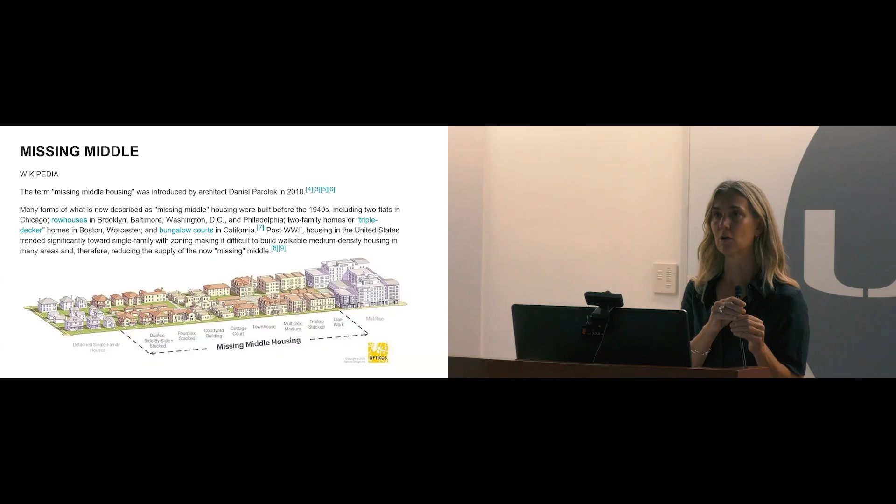But that is where I think part of the heart of the problem is with this housing crisis in the US. There are so many sites that are that scale. And I'll talk about why I think it's so important, but also why it's been such an issue. And it is urgent, especially in places like Boston. So the missing middle is defined by duplexes, courtyard buildings, townhouses, triple deckers, the 6-flat, which is the Chicago type. And so it's anywhere from 5 units to just below 50 is what we think of as the middle scale.

This is our mayor, Mayor Wu in Boston, and there's several cities like this, which is why I want to run around the country and talk about it: there are so many parcels that are the right scale for these smaller site developments. We are 200,000 units short of what we need, according to all the research in Boston. And we're trying to get 200,000 more units online by 2030, which is crazy, but that's what we need in Boston. So that's a lot, right? 200,000, how are we going to do that? How do these little sites even make a dent?

We have thousands of these small parcels in Boston. There are thousands of these small parcels in cities like Chicago, et cetera. So how to help solve it? Smaller lot developments. So Boston, snapshot, these gaps between the buildings that you can see throughout this photo. We have, again, thousands of these. And they're not for big developers because you can't do a big building. That's not what they're interested in building. They're for smaller developers. And there are a lot of them trying to make the bottom line work.

So Detroit is another interesting place where we've been building housing for the last 7, 8, 9 years. They had no building at all for 30, 35 years until about 7 years ago. And now it's been kind of booming and it's amazing. I was at a symposium at University of Michigan a few years ago. That's Maurice Cox, who used to be working with the city during that time, and a few other voices on housing. And again, this whole idea about the missing middle. For example, this was Detroit, full of those small parcels back in 1930. This was Detroit as we found it when we got hired a few years ago to build some housing there.

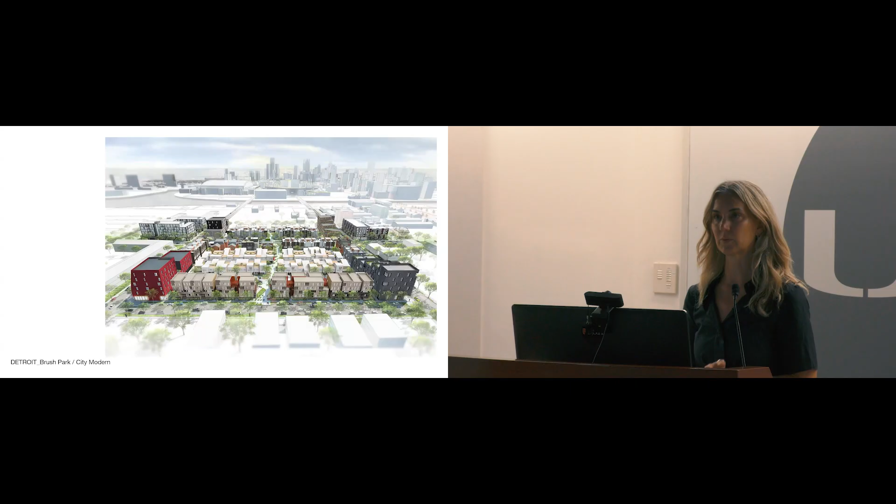This is a view of a project called Brush Park City Modern. It's a neighborhood in Detroit where Bedrock Development out of Detroit hired a handful of architects from around the country to be a part of rebuilding from the ground up. So you can see there are a bunch of different scales of housing, and the ones that are circled were our scope at Merge, and I'm going to show you a couple of them tonight.

Chicago, as I mentioned, also has this problem. They just put out a catalog in the past year. They had a competition last year, and they invited a bunch of firms to come in and come up with some ideas for these smaller parcels. This is Chicago. They also have thousands of these sites. They put together this really beautiful book of our proposals, and that one square is ours,

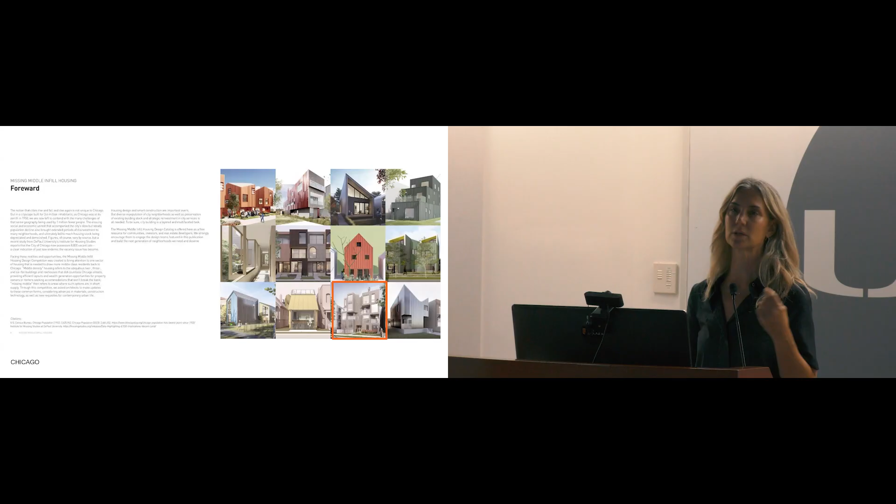which was called the Not So Flat 6-flat, where we had a split level. I'm not going to get into this one tonight, but I just want to show you how the country is trying to tackle this problem and how this has been very much a part of the architectural discourse as of late. So again, how to solve it: smaller lots.

Because I just got here, but I think this housing for all discussion and dignity, I get it, everybody wants a nice place to live. And part of that is a really great building. Part of that is the neighborhood. Hopefully you get both. And space and having enough room and so on and so forth, and potentially raising a family. So not everybody wants to live in a single family house, but I think we all want a home that feels personal, like a single family house and the ideology of a single family house does.

There is something really wonderful about urban living, right? Especially the missing middle scale, because, for example, balconies are close to the sidewalk and they're very much a part of the dialogue with the streetscape. And then there's the stoop, right? The history of all the things that happen on a stoop and the kind of magic of the stoop in a cityscape. I think some of us remember Sesame Street.

And then, sorry, these are a little dry. I'm going to get to the projects in just a second, but I think it's important for you all to know as well, especially the students. Most of the scale housing that's built in the US requires 2 means of egress, 2 stairs. That's a life safety thing. So it's a hot topic because nobody wants to change it. There's a lot of liability, but Europe doesn't require this. That's one of the reasons why there's so much incredible housing in Europe.

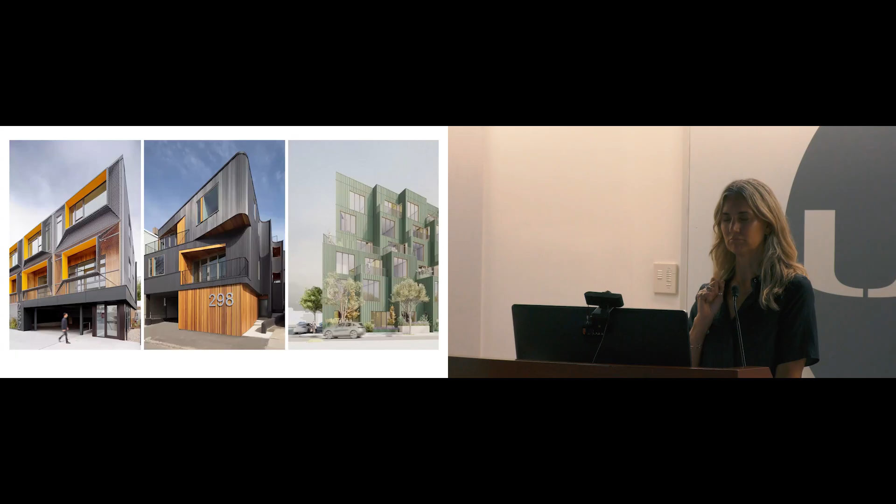So we frame the context in various ways, and we also respond to it. So our work, everything doesn't look the same, although I think there's a sensibility about it that gets repeated, but it is tweaked and tailored and designed and reconsidered for every single site. So I'm going to show you several projects tonight. These are just a few shots of some of them. And so, type.

Just like you guys, I walked by Christina's studio today. They're looking at precedents. I've been teaching housing at the GSD for the last 6 or 7 years. We do that whole thing too. We look at the canon. And these are just 3 projects that really stuck out to me before I started even my first housing project at Merge. Narkomfin, which is Ginzburg's really fascinating shared living multifamily in Moscow. WoZoCo, which is MVRDV's housing project in Amsterdam, and of course, Corb's Unité in Marseille.

So that's Narkomfin on the left, the MVRDV project with these barnacles sticking out in the middle in Amsterdam, and then Corb's Unité.

And what really struck me about these, and you guys are going to see this if anybody's here from Christina's studio. I don't know anybody here, so I can't tell. And you're all like little heads with this setup.

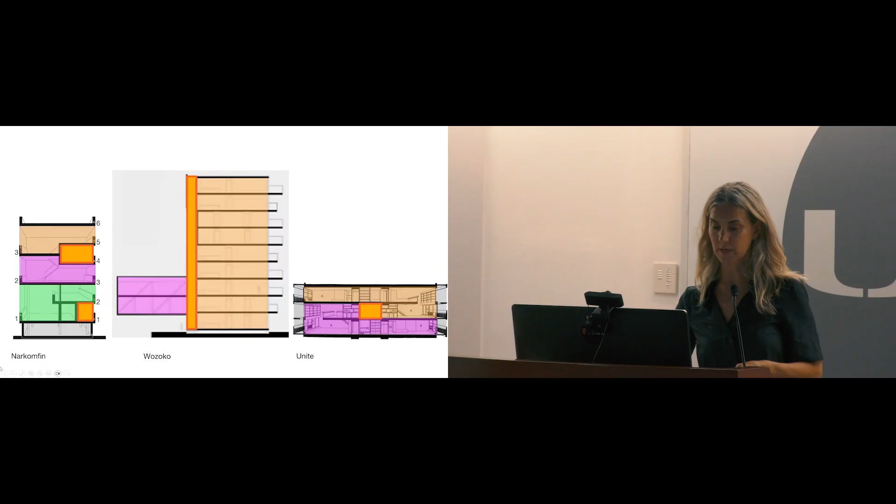Look at the circulation. It sounds boring, but it isn't. What these 3 projects did so masterfully is minimize the circulation, minimize the corridor, so that it didn't happen on every floor, so that these floors, like in Narkomfin, could be used for the unit space versus the circulation.

Can you guys see the cursor? Oh, good. Okay, cool. So the orange is obviously the circulation. So look, there's this big beefy building, and those are the only 2 areas where it's public circulation. The rest is given back to the unit.

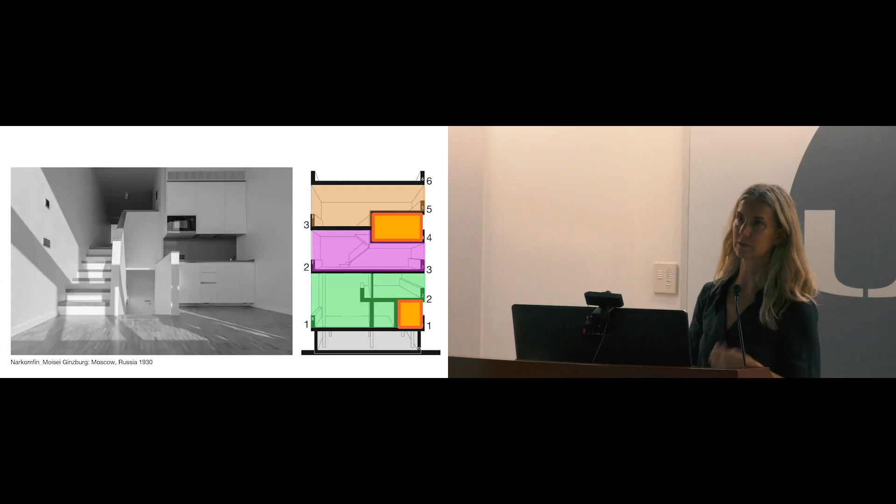This is a single loader with WoZoCo. They had to have air rights. They couldn't actually land the building any wider than the yellow zone on the site. And so they hung off these units, which is a super interesting and cool way to resolve more square footage without touching the ground. And then the Unité, of course, puzzles 2 maisonette units around this central corridor. So 3 stories, only 1 corridor. And of course, those solutions I think create some of the most interesting interiors.

So just gonna race through here. And then of course, other typologies. Those are kind of building types, circulation types. We're gonna look at duplexes, townhomes, triple deckers, et cetera. And so craft, again, just a really fast history. These are the ways that we at Merge think about and thought about, especially in the early years, how to put things together. And we related little projects like this peg wall, which was ours, to projects like MVRDV's Silodam, which were happening at about the same time.

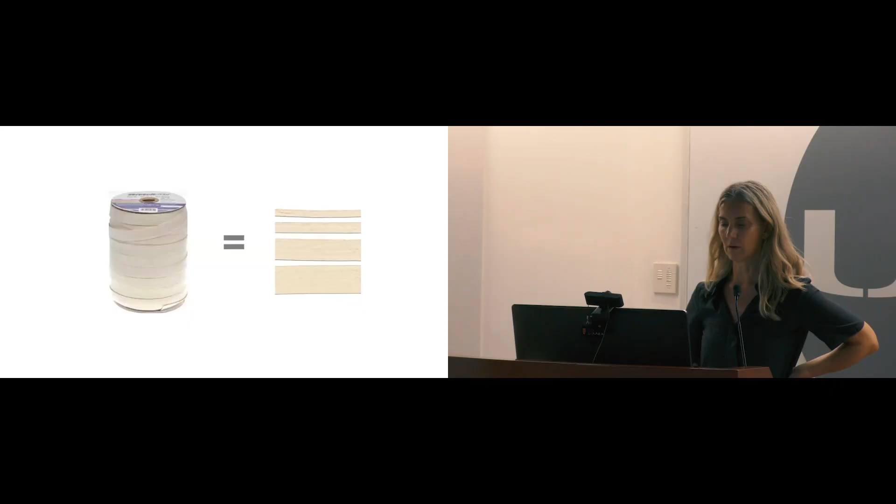We're scrappy, right? So talk about ordinary. These are just straps that we created this kind of landscaped texture on the wall for a restaurant. And then the idea of the componentry of these boxes for a retail space where objects become kind of interior landscapes. Then they become architecture, right? And niches. And then just the expression of the fabrication and how things go together.

So those are the conversations we have at Merge, and then how we started to scale that up into the context of our housing sites. So the first project is one of our first. I always show it first, Marginal 1.0, because we did 3 buildings on the same street called Marginal Street. This is in East Boston. It's on the water of an operating shipyard. It's right next door to it. This is the building right here that we built.

And so it's really fascinating because this is East Boston. So it's a working class neighborhood. It's been on the rise, it's getting gentrified. It's wonderful. It has all this potential, but it's been one of the lower income neighborhoods in Boston for decades. And it looks right across, though, has the best views of any neighborhood in Boston back to the skyline of Boston, which is over here.

So the seaport area that I showed you where we work is right here where my cursor is. So this is all downtown Boston. This is East Boston. There's a couple of bridges that go over there that connect it. And so this was our site, flanked by this warehouse building and triple deckers, right? So what are we gonna do? And so we had this sort of double wide, triple wide site. We did this dumb box. The budget was nothing. And it was right on the water though, which was pretty extraordinary.

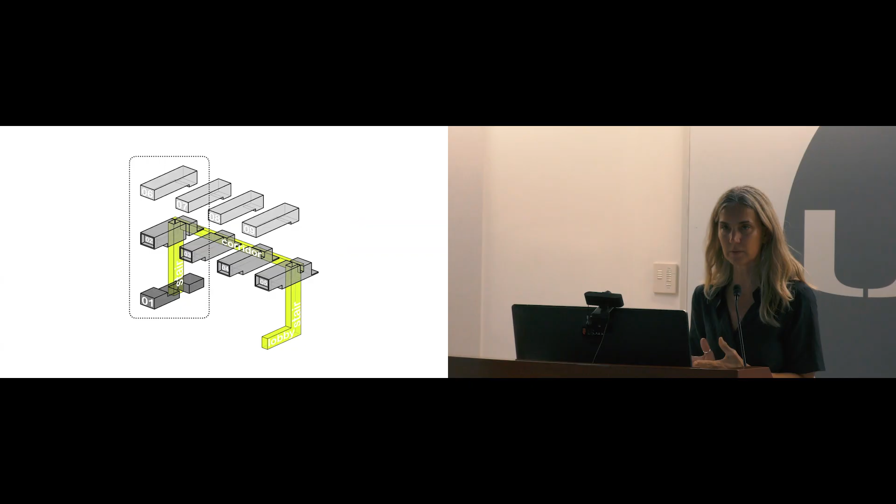And so again, back to the 2 means of egress, we had to get 9 units. They had to be really narrow. They all had to have water views. We had to fit all these bedrooms, right? And so we really needed floor-through units. And yet we had to get the 2 means of egress to cross grain through them in the middle. And so it became this puzzle of how to maximize the minimum of common space, which is a big equation for the developers. They want as little common space as they can get until you get into really luxury condos and rentals, which have a lot of amenity spaces.

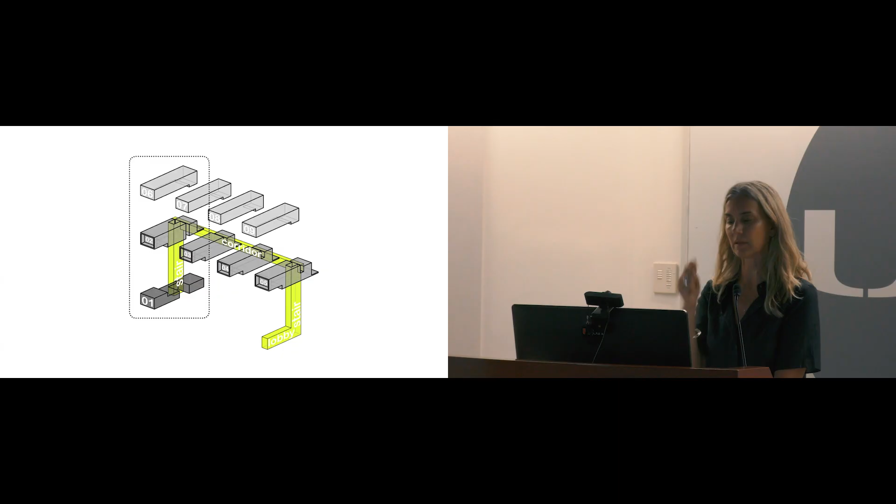None of these projects, except maybe the last one, are about that. They don't have the luxury of actually having that kind of excess square footage or the price point. So it's all about giving as much back to the units so that the sale prices are bigger and the units are better. So this in section, or in concept, were these stacked tubes, floor-through units. We had to get parking, which has been a beast in Boston for many years. It's changing now. And then have these two means of egress that skewered through the middle of the section.

So much about housing is gaming zoning and building codes. Zoning wouldn't allow for more than a 3-story building, but we snuck in a 4th story in the middle. No one was the wiser because it looks like a 3-story building from the exterior. And we're able to have the top floor units accessible from the floor below, which allowed us to not have to have a corridor in the top floor.

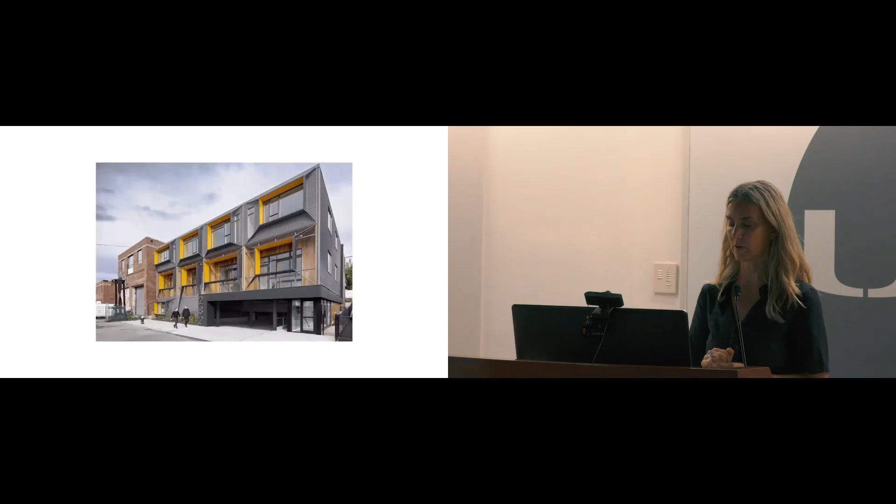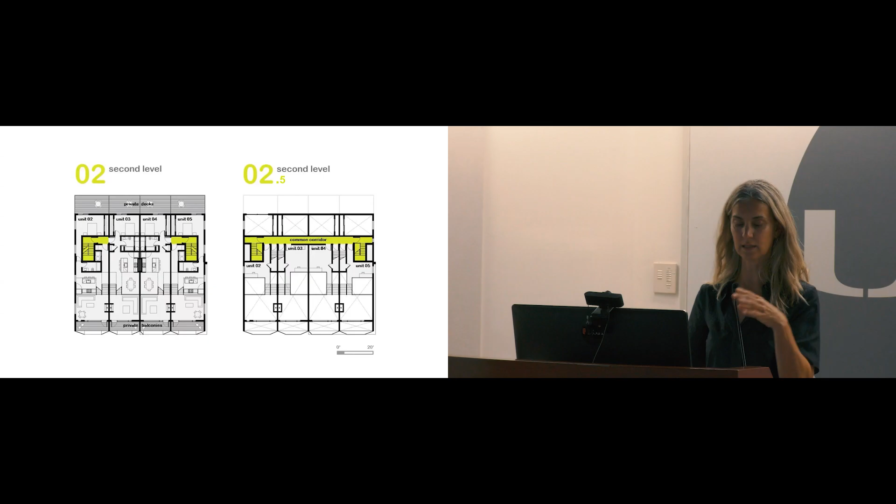So, you know, it's a pretty simple box. Again, snuck in that 2 means of egress, and this shows the circulation on the ground floor. It's separated. Separated on the 2nd floor, 2.5 floors up is the only corridor in the whole building that connected it and allowed for access to the top floor, which has no corridor. And so again, these units in the middle, which were quirky, became, I think, the most interesting spatially and volumetrically because they have all these kind of catwalks and layered space and so on. And that's the top floor.

The facade we sold to the neighborhood, they thought the design we had looked very odd next to the triple deckers, but it was a very industrial edge. And so we designed it as a kind of vertical screen that we had somebody sew onto this facade. So bringing back in this idea of assembly and the way that we think about craft onto just the front facade as a kind of vertical growing screen.

And just a few shots of that. And then a great view. The thing about dignity, back to that word, that has been set up in your own conversation around this here at the school. You know, part of dignity in housing for me is being able to get outside and breathe. I think in Miami, you have a lot of space, but a lot of the cities in the US like Boston just don't. And so even when we are designing in these shoebox dimensions, we always try to design into and convince the developers to find a way to get the residents to have private or semi-private space within the building.

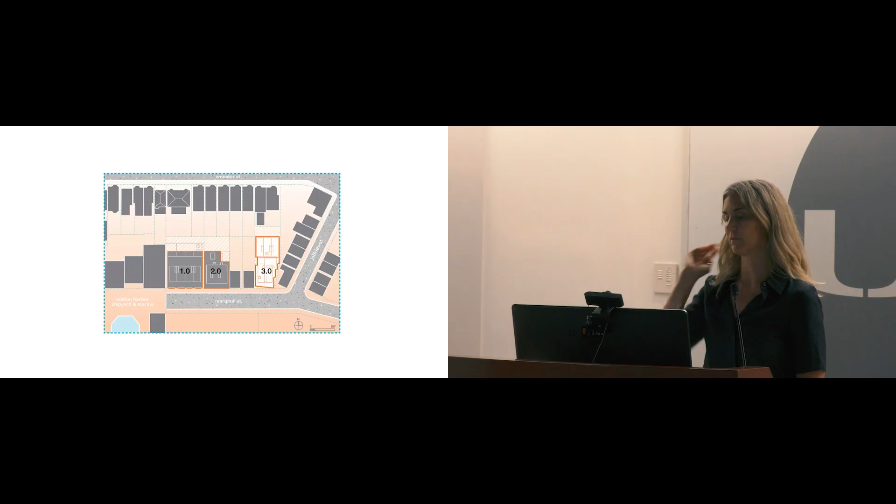Another project right down the street from that, same street, we ended up doing 3. So I'm showing you number 3. Number 2 was a lot like the one I just showed you. But number 3 was a really different site, actually sandwiched only by triple deckers. Very narrow, very deep site. We had to fit 7 units, also near the water. But the only way it would really work, and I urge the students who are doing housing studios to really think about hybridizing unit types in your building.

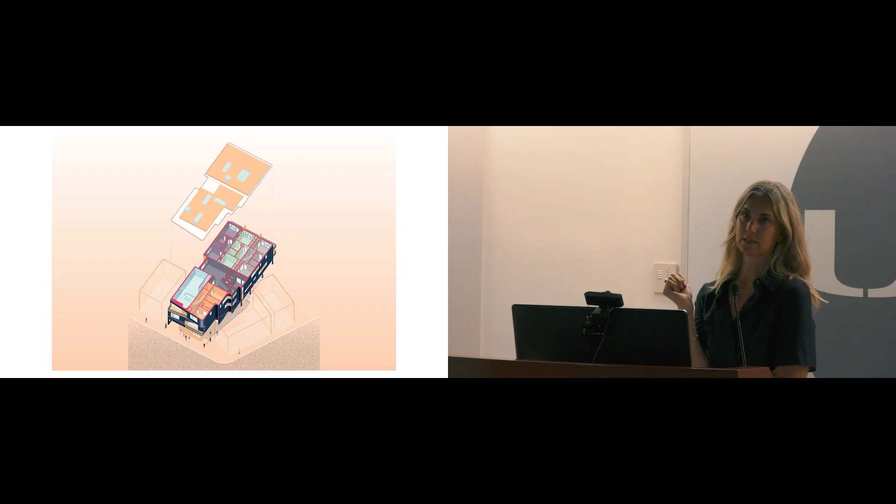Not only does it make for a more interesting demographic that lives there, right? You got flats for singles or studios, and then you might have a 2 or 3 bedroom for families and things in between. So the only way this project would work is if we got really inventive about unit types because it only had a little bit of frontage. Luckily, we had a lot of required setback in the back, which is where this area is. And we sold those back units as townhouse units that actually use the backyard as their front yard.

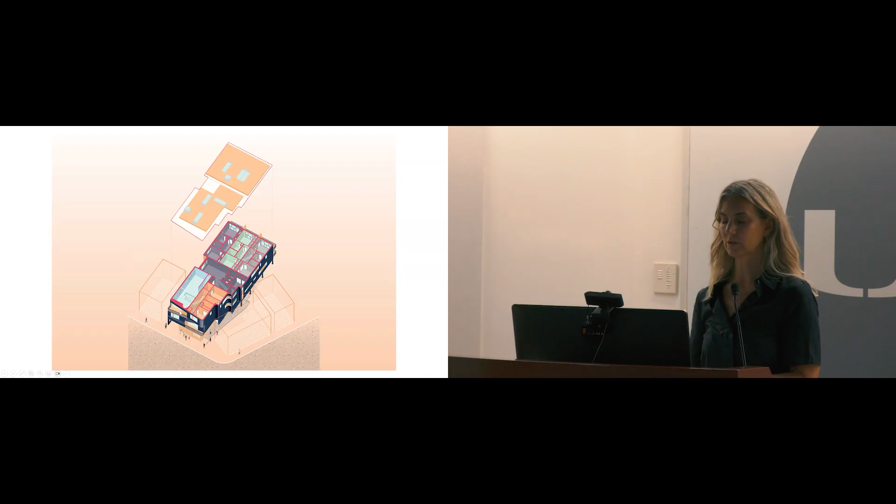2 duplex units on the front that had the killer views to the water. And then 2 small flats, which would be the less expensive ones, kind of landlocked in the middle. And so it became this kind of quirky, Frankenstein kind of hybrid of different unit types. But it was extremely successful because there was a price point for everyone, and we found a way to design for those middle units light and air and even balconies, which I'll show you.

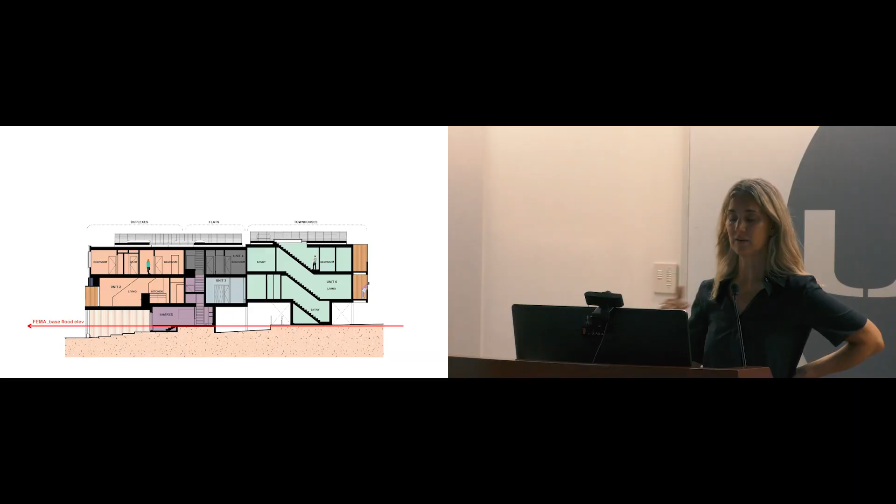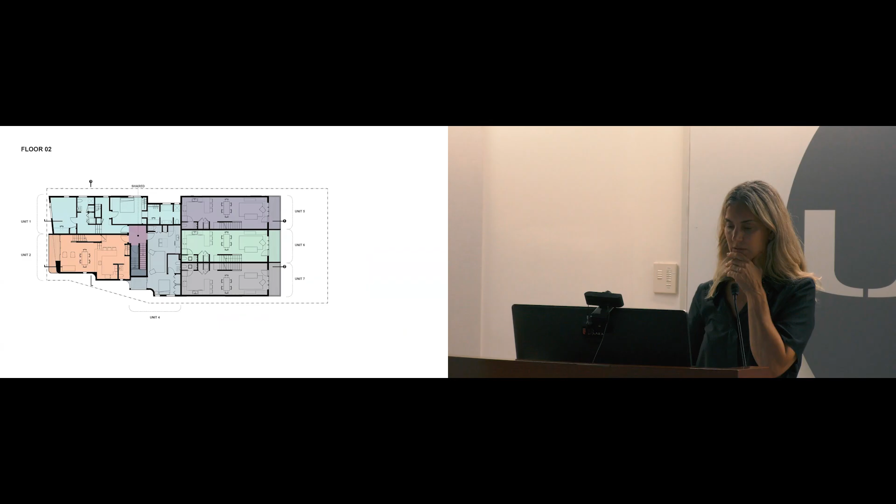And just to complicate it even more, we were in a FEMA base flood elevation, so we had to build 1 foot above that elevation. And so we designed it as kind of the back, the green were the townhouse units that were accessed to satisfy the FEMA flood zone marker. And then the front was designed almost as a separate building, even though they're conjoined as one, with a single means of egress. So again, gaming code, this is the townhouses, and also zoning to try and make this site viable.

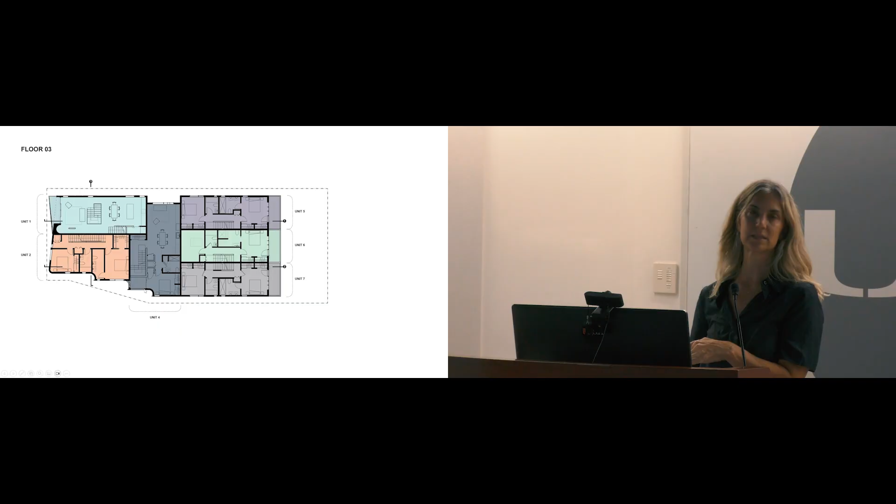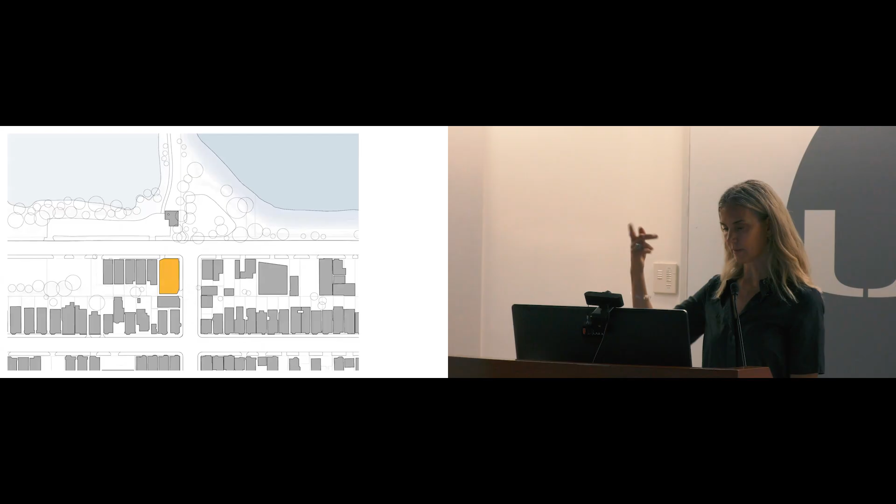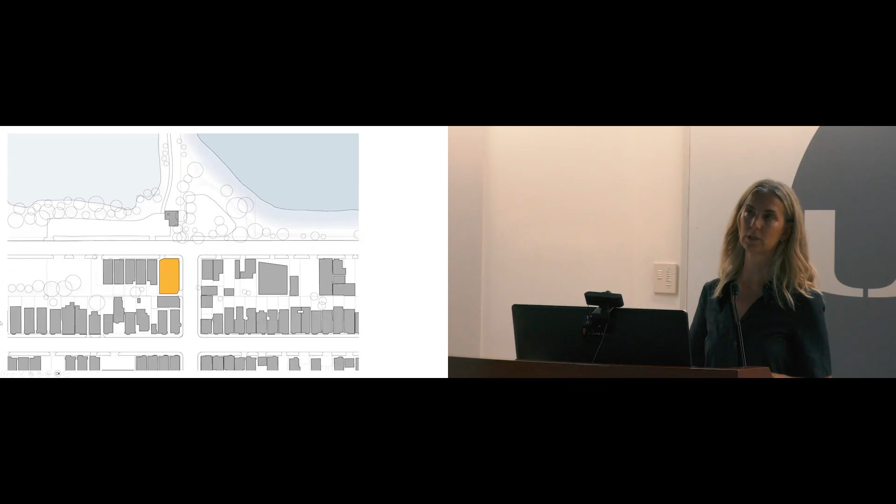Another project in Boston, these are all smaller and then I'm gonna get bigger, is on the corner on the other side of East Boston, even grittier, on a street called Condor Street, facing a very industrial edge, not with a view of Boston, but in a neighborhood that's kind of slowly starting to develop and evolve. But this was a big corner site. Again, a lot of double and triple deckers is the context, and a lot of these small industrial buildings. This white building was the building that we took down, and this is our project site.

So we were on this steep slope dealing with this kind of vernacular. And this project, again, couldn't be more than 3 stories. So we were able to carve in the parking on the first floor, which was counted as a basement, even though it's half in, half out.

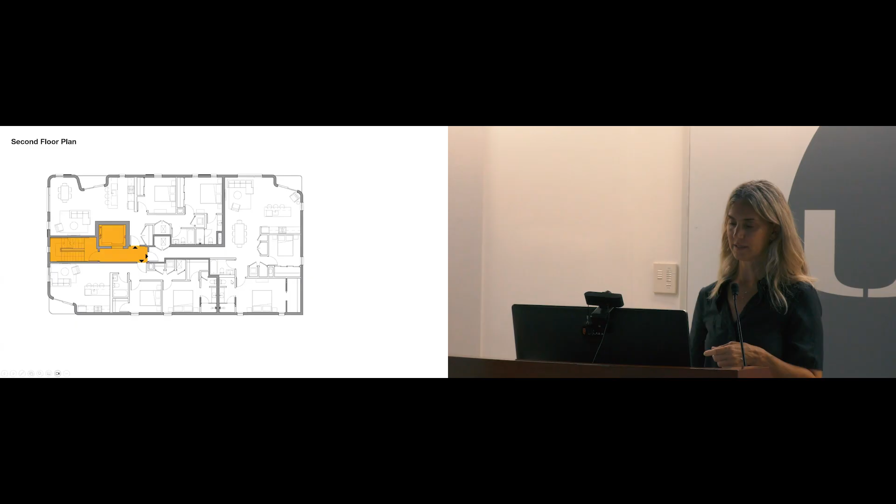The double loaded is very short. Part of the problem with double loaded corridors is they're long. And so again, we gave it back into the unit. Tried to come up with this curved language that would create kind of a counter to the vernacular of these hexagonal bays that have been proliferating the East Boston area for decades, and also try to negotiate that corner of

these 2 streets. And then those curved spaces became a way of zoning the interior in a way we hadn't done before. So like a reading nook, and a way to kind of shape and zone these pretty compact units, but the living spaces with them.

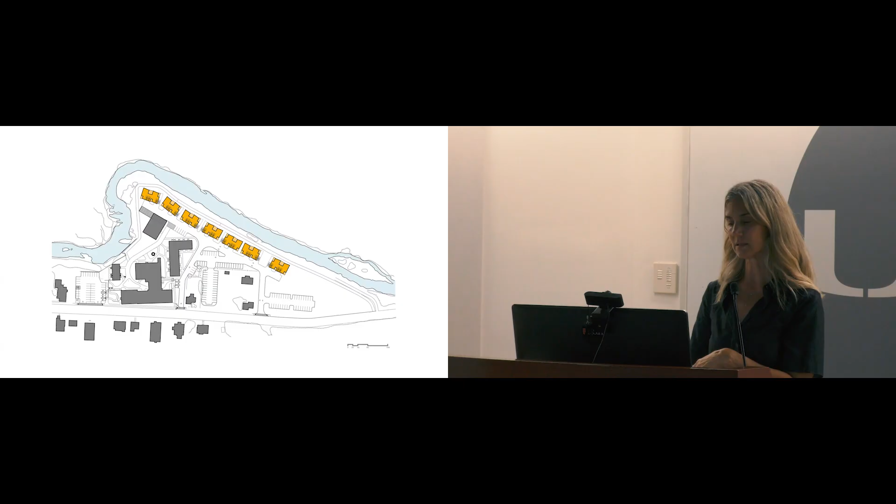And so we got real. We looked at the vernacular barn. We looked at these old vernacular mill buildings. This is actually adjacent and part of our site. That orange area is where we built. These were all turned into lofts, which was a project that was before our time, but it is already turned into residential. And so we did a series of duplexes along the river. So there are 14 units in total.

Looking at this idea of the contemporary barn and the board and batten, thinking of it as a materiality, a kind of translation from, I think you saw a similar palette in these metal boxes that we did in the city that we're bringing out to the country, and how we still, even though it's very abundant with exterior space, how do we carve in this kind of private and semi-private outdoor space for each of the units? Each one of these houses is a 2-family and a 3-family combined.

And so, looking at really dumb, very affordable materials like white cedar and Hardie board. So the Hardie board, we just stripped and made this series of battens in this ribbed texture for the envelope that also became the railing. The units, the 3-bed, the 2-bed, this courtyard, we use courtyards a lot in our projects. Even though they're small, they're incredibly impactful.

I think this is like a 5x7, but it's a way of literally bringing the exterior into the inside of the space, of the living space, and dividing up these 2 rooms for different living areas. And these are some of the images with that small courtyard. You can see how it affects the interior. Feels like a tree house.

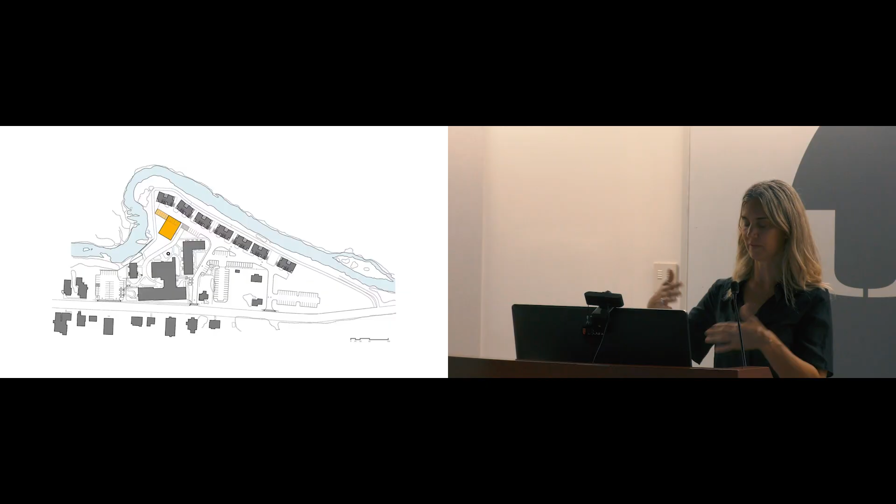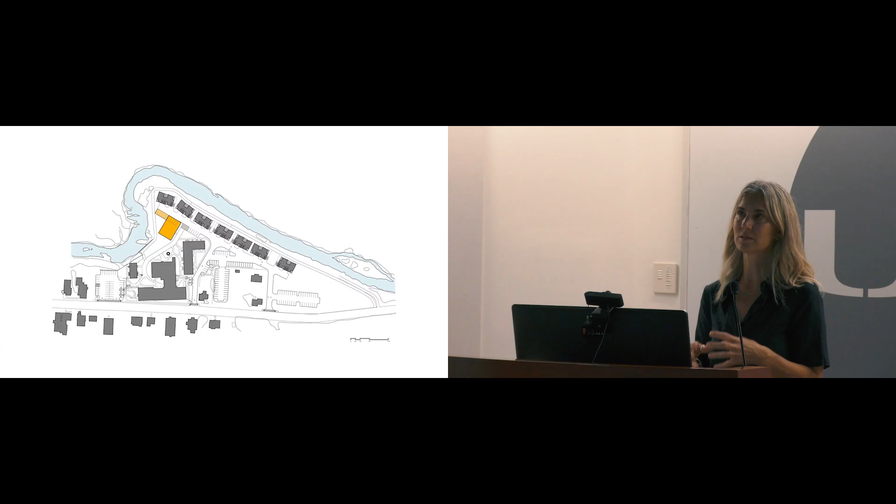And then adjacent to that, a project we call the Modern Mill, which was another multifamily, which really was the transition from the mill building down to the duplex. I was just talking to Rudolph at the reception. He's like, I hate it when people think that you have to transition from a big scale to a small scale in a city. But we could talk about that. But the idea was that this site, the one that's in orange, was a bit of that translation from the historical mill to the duplex.

So again, the historical mill, and then this is what we're calling the modern mill, which was just a 2-story, 6-unit building, taking the batten language, scaling it up to the scale of this building, and adjacent to those were the river houses. So here we look at the language and the detail of the batten in the case of the modern mill building as an opportunity to do this custom recessed downspout. So bringing those elements into the language, which started with the barn, into the project.

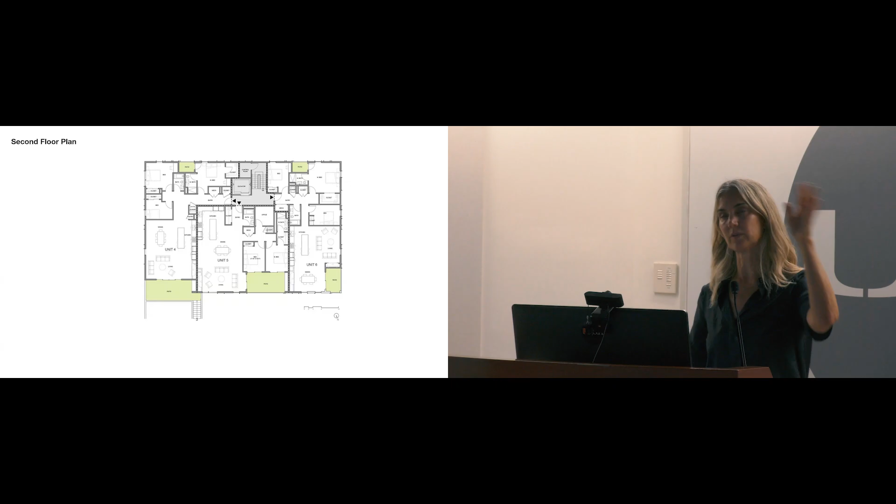Single loaded corridor. I think out of all the projects I'm showing tonight, maybe there are 9 of them. Only 3 projects had 2 means of egress. We were able to strategize 1 stair. So right now, the code that we have to work with in Massachusetts is no more than 4 units per floor, no more than 3 stories, so no more than 12 units, you can get away with a single means of egress. The whole single egress reform is trying to almost double that.

All right, moving on to Detroit, things got bigger. Again, this neighborhood that I showed you before, Brush Park, City Modern, we did what's called carriage homes.

So, all right. So the carriage homes, which were essentially like small townhouses, the reason why they're called carriage homes, and that's how they were branded as well, that's how they sold, was because they live and were built inside of these super deep blocks. So the carriage home, by definition, historically, is a building behind a building, right? It's the building that would house the carriages for the house that was in front of it.

So this was our site. This is Detroit 2014. We showed up, I think, around 2015, 2016. And this was the whole Bedrock development neighborhood. And so it's crazy, right? Because that was all filled with small parcel buildings back in the day, and then vacant, pastoral, and then there are these extraordinary, at the time, neglected, abandoned brick mansions, beautiful, spotted along that had been taken over by squatters and God knows what.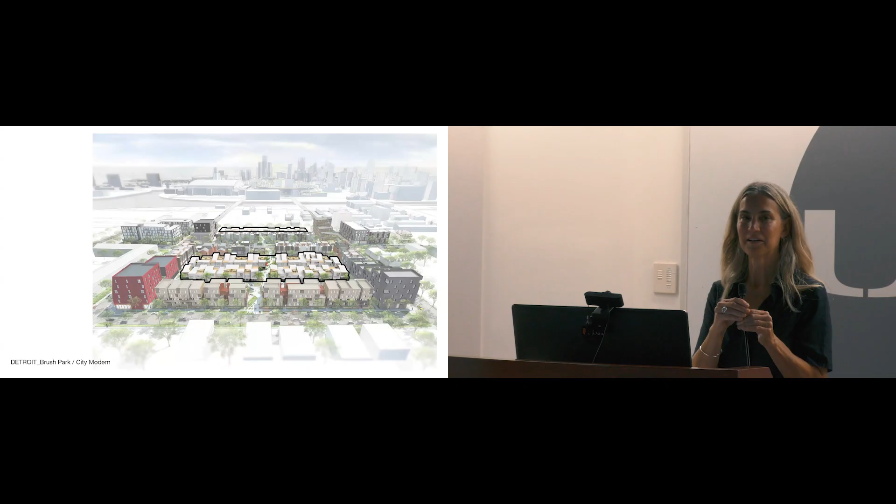And the meetings were incredible. We all had to think about, this is before we designed it, what, your carriage homes, if it were a car, what would it be? It's Detroit. So there was a whole conversation around how do we personify, how do we think about the attitude of these different parcels? And then there are these incredible homes that I mentioned, the brick historical mansions. So the carriage home is the house behind the house. Carriage home is kind of a townhouse. And so those two types were what we were working with.

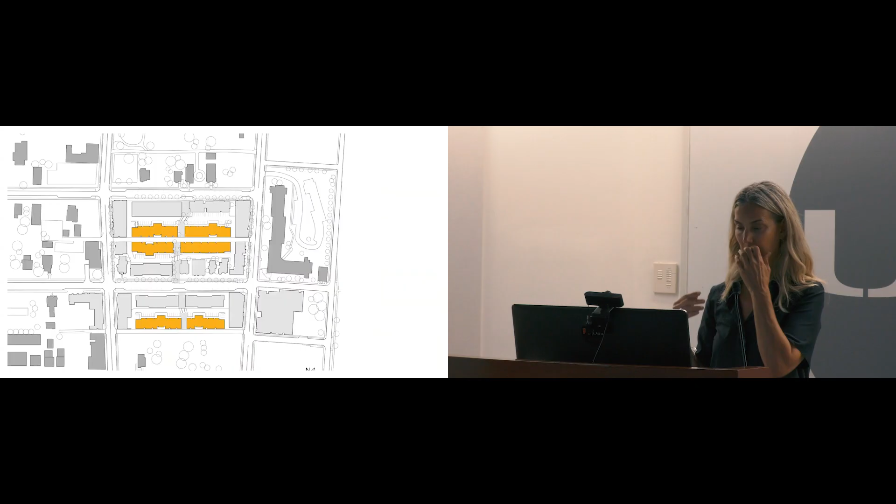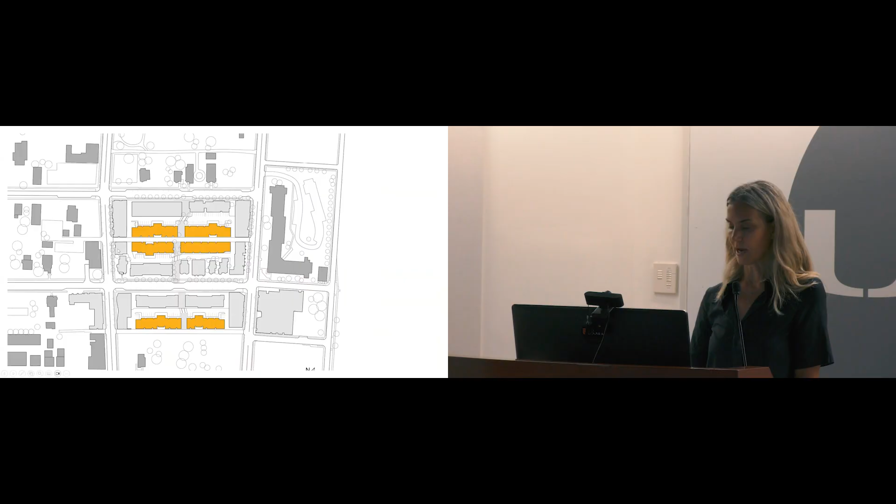And this is our site. So these are alleyways, which became their frontages that didn't exist before we all got onto the project. So that's why they're in the middle of the block and they're called carriage homes. This was the breadth of it. They literally were stitching all of these peripheral buildings together. There's a really interesting, this cut right here, this image doesn't do it justice, is called the Mews. And it's a really beautifully landscaped pedestrian path that cuts through all these blocks.

But the idea was that we were doing a townhouse. The problem with the townhouse is it's narrow, it's deep, the middle of the plan is dark. And so we thought, well, what if we do these paired types that have a small courtyard between them to let light and air in the middle of the deep plan, which is usually where it's dark. So the way, these are condos, these are not rentals.

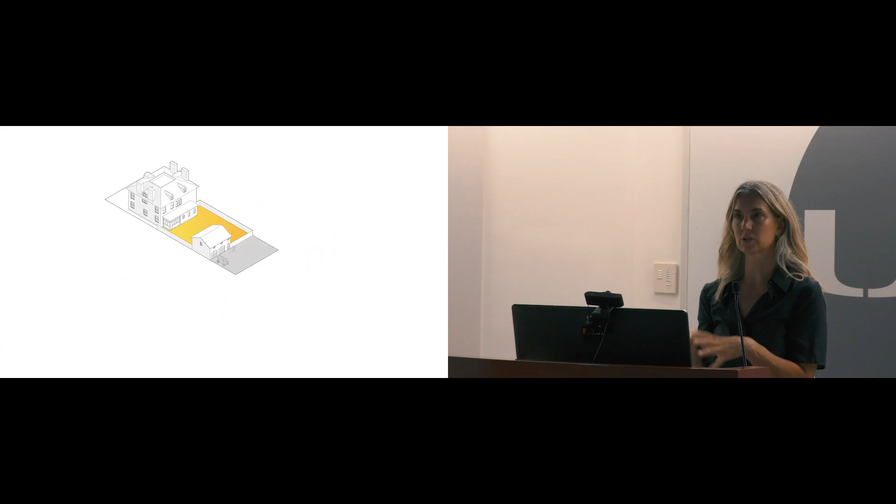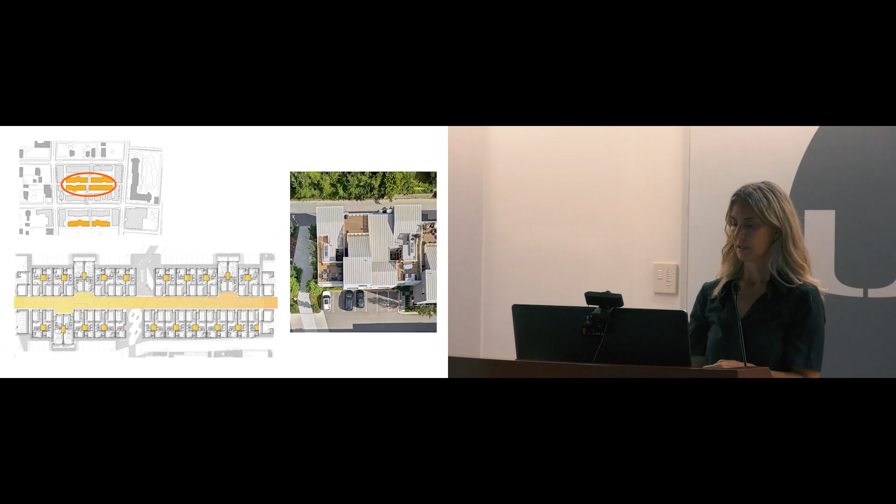So the way that it worked, one unit, which would cost more, actually owns the courtyard, has transparent windows into it, and the unit next to it that shares it doesn't own it, doesn't have access to it, but has translucent glass and gets borrowed light from it. So it worked out really well. There's these sort of porous blocks of around 10 units each. There's 6 blocks.

Those courtyards pop up. You can see them here in the texture of the roof, in between these oscillating roof decks. So the angled roofs actually provided privacy, and we toggled from one side to the other with the units' roof decks so that they weren't totally adjacent to each other, and then created literally the 5th facade. There was like a whole scene up on the 3rd, 4th floor that you can see here with all these roof spaces that were in communication with each other. The corner units, apartment units also had a lot of common space that would look down onto this roof.

And then the kind of homage to this clover pattern, which showed up in all of these mansions throughout the neighborhood, is we did a custom perforated panel. It's very subtle, but that was the actual stamp and the design of the cut.

So it was an interesting new type for us, where the garage was the front door, it was the alley. We created what little bit of dimension we had into these front stoops. So we were really trying to create a social space that was vibrant, but yet private, with these recessed stoops, right? So it's shared, but they had their little bits of privacy. So it was very dense, but also very porous.

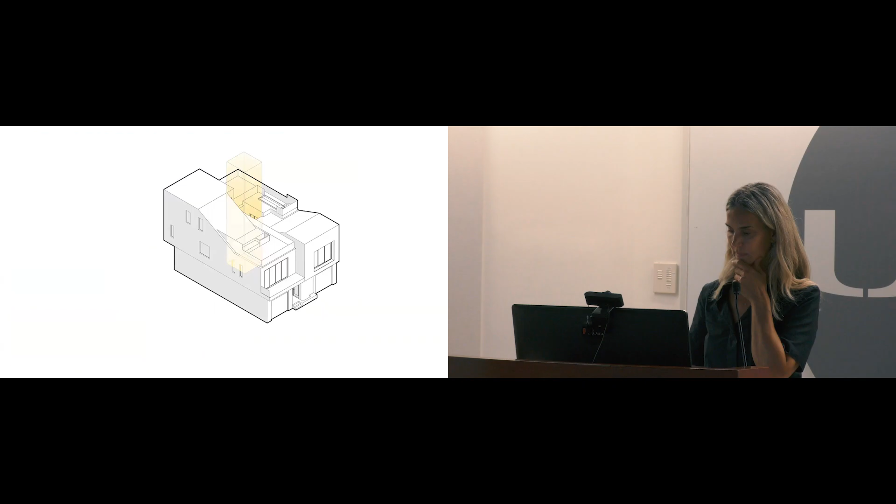A few images of how that courtyard shaped the interior. This is the middle of the plan. Again, this was going to be the darkest spot, right? So we either had unit types that ran parallel to the courtyard or perpendicular, but they all, of course, let in a lot of light within the middle of the unit. And then again, they're small, but they're pretty magical because they're small and they're not that tall. So they actually get quite a bit of light.

A project we just finished a couple of months ago, right next door, very different, we call it D2 because we have another one called D3, but they're basically stacked duplettes is what they call them in Detroit, which are essentially duplexes. So we did 2 over 2, right? 2-story units over 2-story units into a 4-story building.

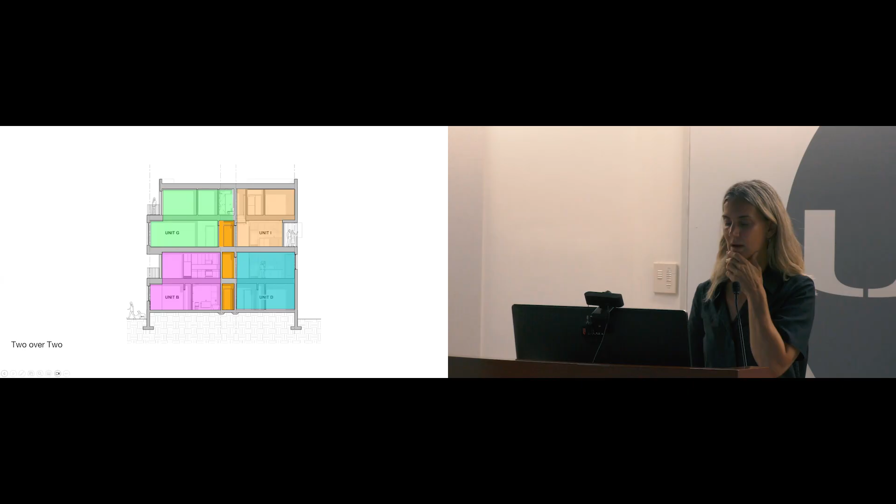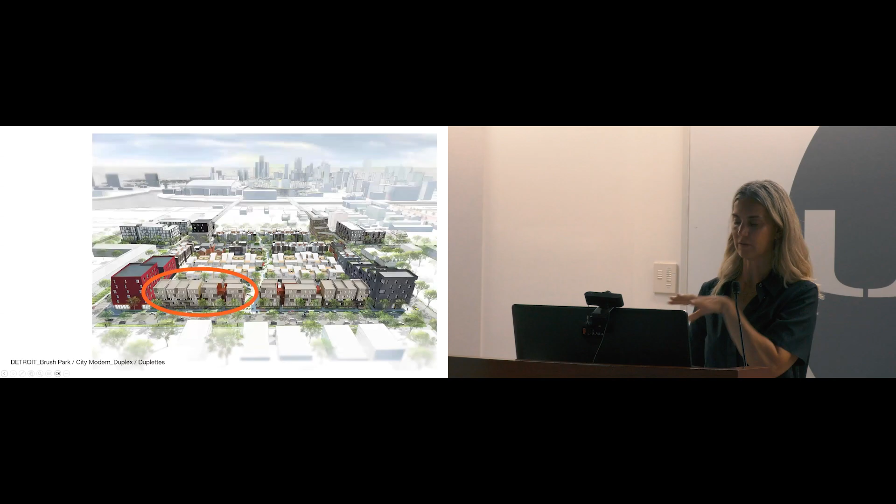Again, minimizing circulation, allowing that top floor to not have any common space because it has a connection down to its private unit on the floor below. So those were the carriage houses. Right in front are the duplexes. In this case, we were on the main street, and we really did have to respond to the brick and the historical commission to make it more contextual and relevant to that materiality that was the history of this neighborhood before everything had been torn down.

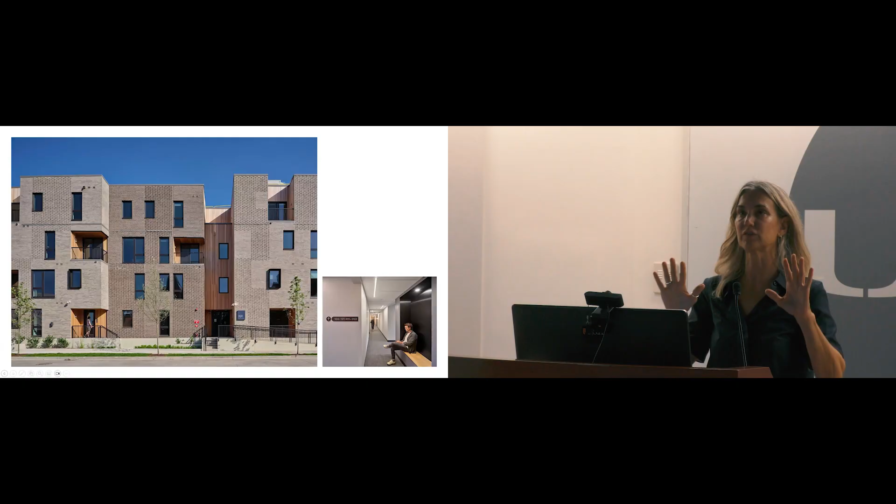And so this is one of the few double-loaded corridors we've built, but again, we try to minimize the double-loaded corridor. We only have it on 3 stories, and we have these stacked 2/2s. And so this was a really challenging budget project, and in the beginning, we had many different forms that were kind of staggering in and out, and we had to simplify. I think we had 8 different, let's call it, shifts in volume, and we had to get it down to like 4 or 5.

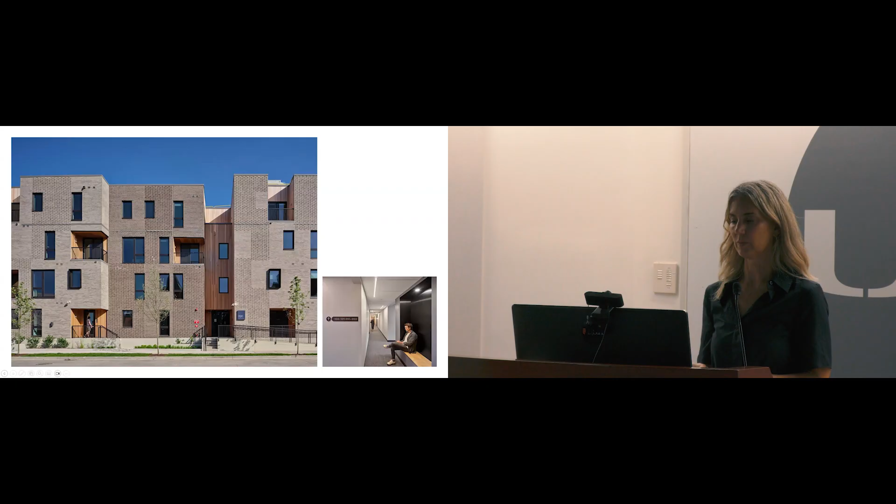And so we really were trying to think about the material of brick, right? As a lot of us have been, especially in the last 10, 15 years, so many beautiful contemporary brick projects out there, and how we could think about the patterning of the brick, the texture of the brick, turning the brick, right, into at least a kind of nod or symbol of the 2/2 language within the building, the stacked duplexes. So that's what you're seeing here is a pattern of kind of a 2/2.

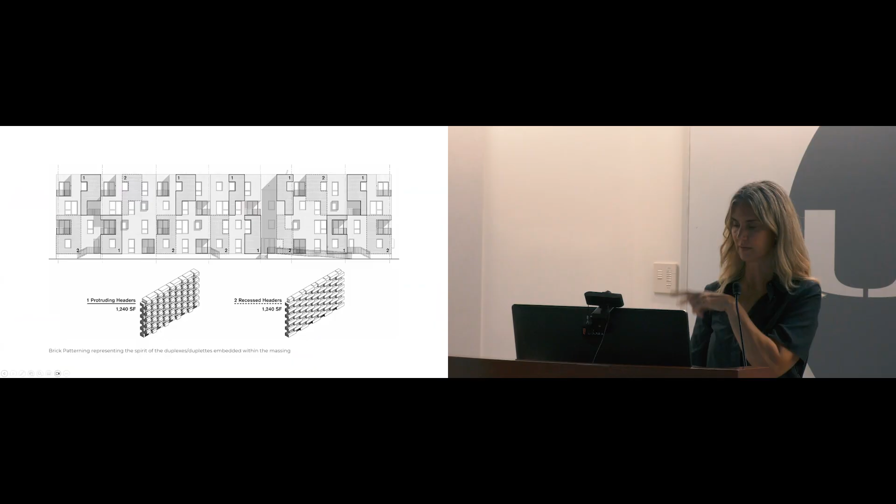Just some plans, pretty straightforward. Every unit is 2 stories. There are a few flats kind of squeezed in there. And then how we designed, again, the assembly of these bricks and how they brought to life the language of the 2/2.

So that red building, that's one of Lorcan's corner buildings. So he works in LA. So that's probably the reddest building in Detroit. It's great.

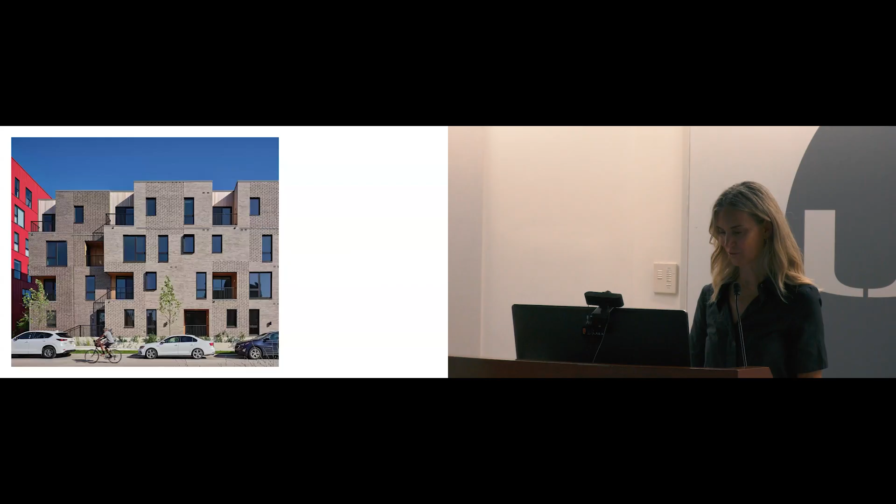So we have mixed a lot of wood with our material palette, either with metal, with brick in this case. And it's been tricky as a material, but in every neighborhood we work in, I think a warm contemporary palette has been a big deal in terms of negotiations with the neighborhoods that we have to work in.

I mean, Miami, I know a lot of the students here aren't from Miami, but it's very different here, and like LA and these warmer climates are, for some reason, more open to these contemporary kind of solutions for cladding systems than places like Boston and Chicago. So the wood has been a big part of our palette on our housing projects because we think it's important. We think it feels somehow more domestically scaled than a lot of the materials out there in the larger, kind of above missing middle scale housing projects.

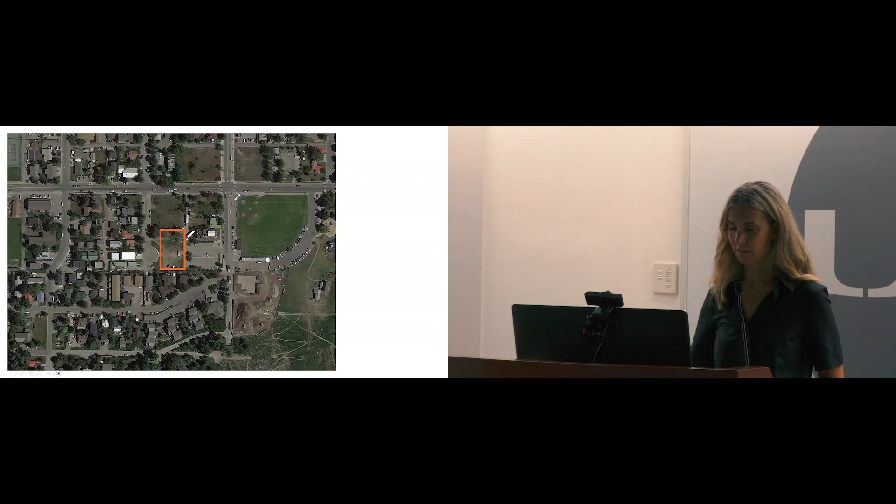But the challenge was the neighborhood we were in was mainly a bunch of single family houses. So they didn't want the density. They didn't want the big bulky building. That's our site. This is Snow King right there, zooming in. We're at a cul-de-sac, right? You can see the small scale around us. And then the context is like the Western vernacular barn and cowboys, and I'm not kidding, like cowboys. And they like this, right? The people who go to Jackson go for this, most of them. And so there's this kind of weird mountain modern thing going on out there, and we were like, oh God, okay, how are we gonna fit into this?

And so the tricky thing with the building is the zoning code: we had to build one building, we couldn't build three. So we weren't allowed to build three smaller buildings, which the neighborhood wanted. So we had to build one. And we had to get the number of units we had to get and so on and so forth. So this thing is designed to the inch, and we got 20 units, could not have sustained another 10 square feet with all the setbacks and regulations.

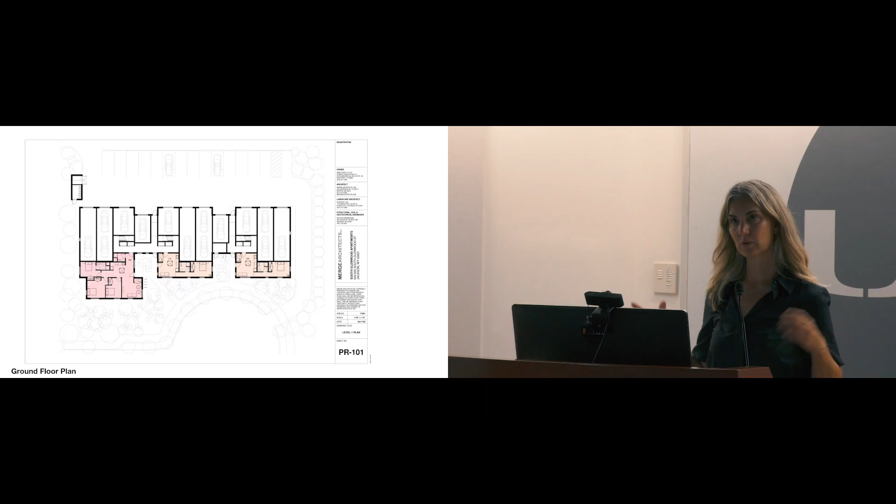But the way the massing works is above the first floor. First floor, one building, so we check the box. Everything above it becomes three. That allowed us to do single stairs for each of these three volumes, the point load, and really minimize, almost embarrassingly efficient, the common space, which is the orange, which is just a landing at the top of the stair that accesses 3 units, and sometimes 2, on every floor.

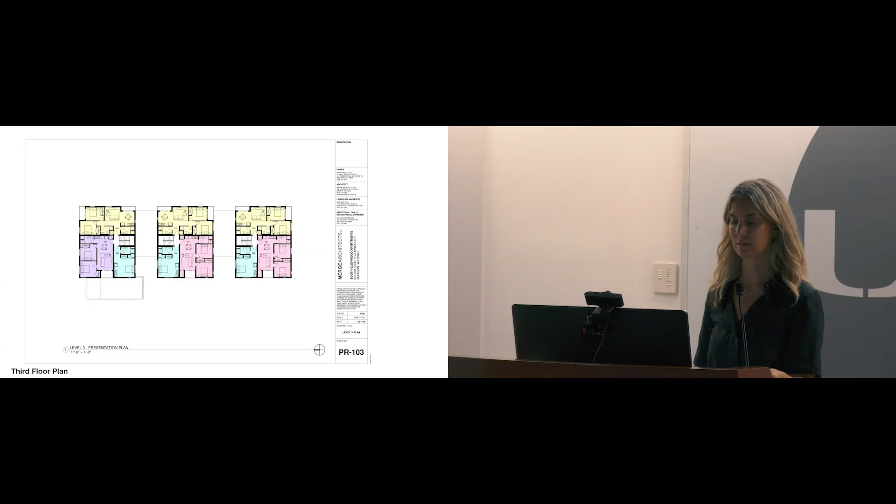And so this is housing. Figuring out this puzzle is housing. Of course, making the building look great, yeah, right? You're all gonna do that. But figuring out what is the right efficiency for each project is a do or die equation. It just is. And I'm happy to talk more about that at the end of this. But again, super efficient.

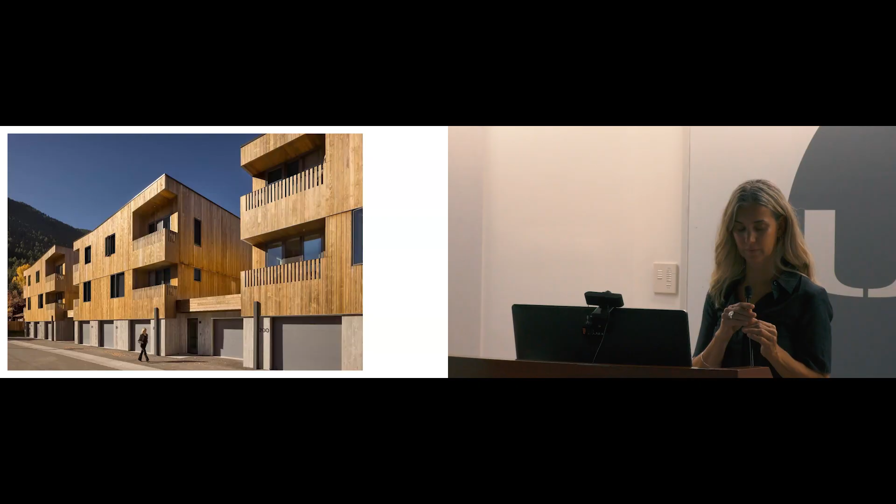The client was awesome. He really loved board form concrete, which was a splurge, but we were able to do that at the base. This is the back with the garages, and then we had this beautiful Kebony wood siding for the upper 2 floors. Used it again. This was a detail we used in the river houses where the cladding and the width of the cladding wood strips becomes the balcony rails.

And then how it sits within the landscape of Snow King. So the subtle slope is due south. These are PV-ready roofs. So there's a reason for the orientation of the cant. And then, of course, thinking about the hills and the kind of undulation of the natural topography.

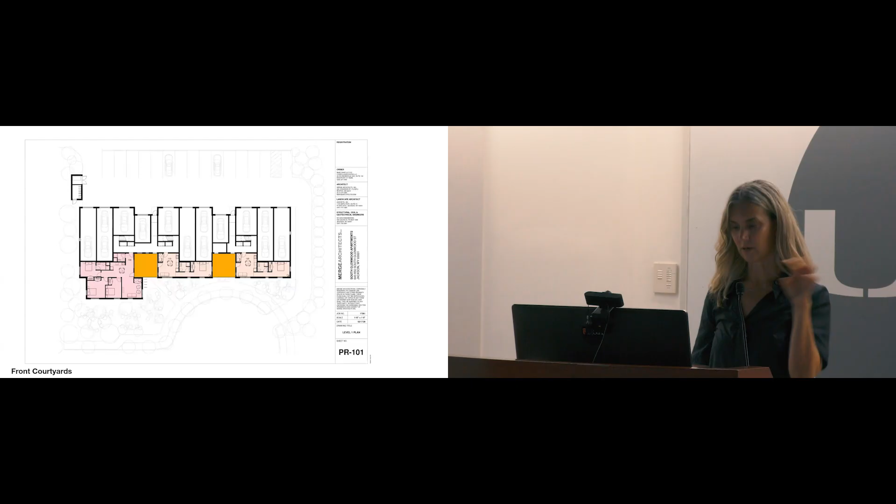It's really an extraordinary place. This is the front, this is that cul-de-sac, and then you can see how the base is all the concrete, but then there are these 3 volumes that float above it. And then that also allowed us to carve in these front courtyards, which became the entries where they would have bikes, right? And then it became like a bench, this whole little social space.

I mean, I think everybody that lives there is between 20 and 35. There's a real culture and demographic that is around 20 to 35 in Jackson, Wyoming. A lot of people go out there after college and then never leave. And they're doing all the various odd jobs in town. So it was kind of built for that demographic.

The units are really modest, but they have these killer views. They have balconies. They're small, but they're meaningful. And here you can see the modest interiors.

And then lastly, do I have like 5 more minutes? I keep looking at Veruska. I don't know. 5 more minutes? Oh, perfect. Okay. 2 more projects.

Just what's next? So all that, we built it painfully, hard fought, so hard. Housing is so hard, you guys. It's totally worth it, but it's really figuring out all the zoning and building code. Every building's hard, right? But there's something about housing, figuring out the geometry and the way that the units puzzle together and the kind of units that work well together, that are market appropriate and so on and so forth. It's tough.

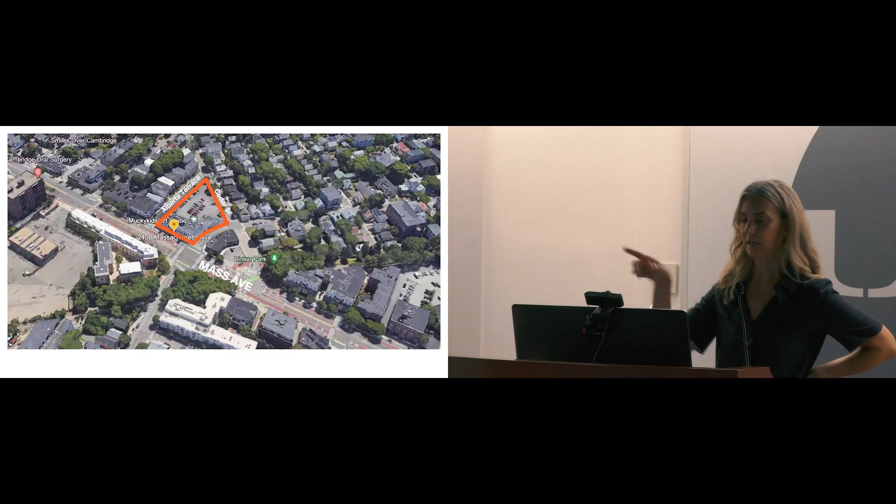So what's on the boards at Merge in terms of housing right now? There are a few things, but these 2 projects are super interesting, very different. Block housing. I'm calling this block housing because we finally got a big, fat, full block in northern Cambridge. And it's a crazy site, and it's so good for us because every edge is wildly different. We've got this busy street called Mass Ave, which is a main street that goes all the way through Cambridge through Boston. It's huge. All kinds of things happen along it.

In this stretch, there are a lot of industrial buildings, big buildings like that one right there. They just passed new zoning. Things are going to get even bigger. And then it's flanked by this sweet little street called Alberta Terrace, which are 2 and 3 family units, triple deckers again, and then Cedar Street, which is single family. And we spent, I think, about a year working with the neighbors to talk about what they could live with and what they couldn't live with. And we created a new zoning for the site that would accommodate all these edges, which was not easy.

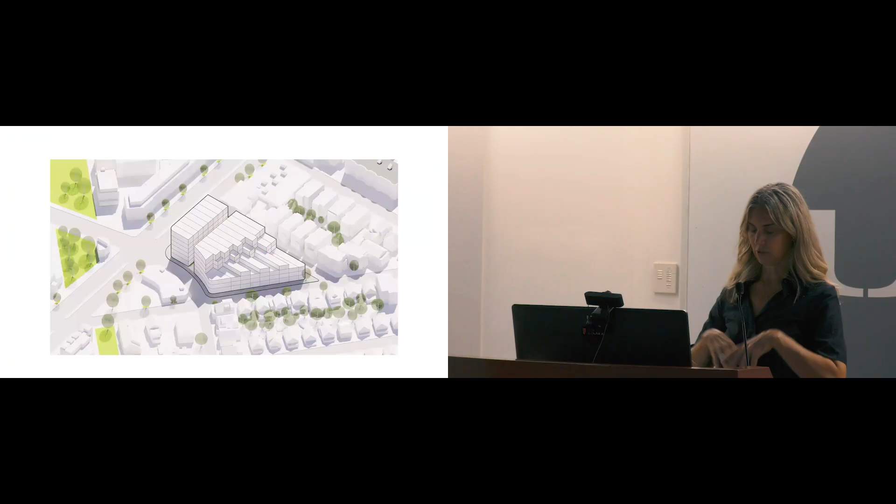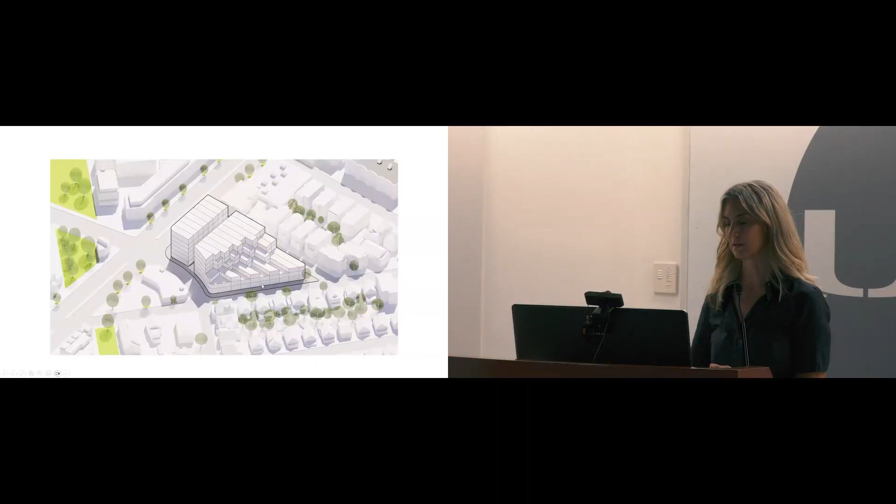But what we did is we carved and carved for various reasons to find a way to build 2 buildings. And then the big one on the back, facing us, is the one that cascades down to the single family street. And so what that allows is that this whole edge really negotiates the Mass Ave scale along with the 2 and 3 decker houses down to the single, and then provides these really great, very generous outdoor terraces off of those back units. And so that's where it is today.

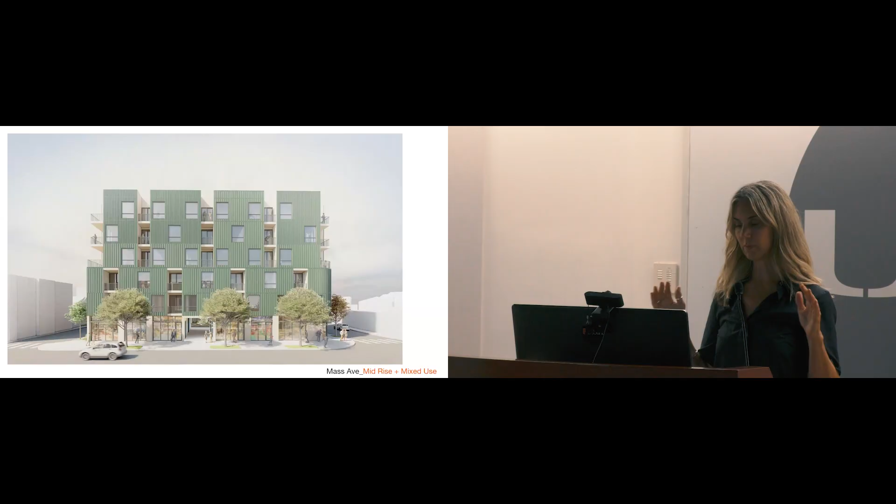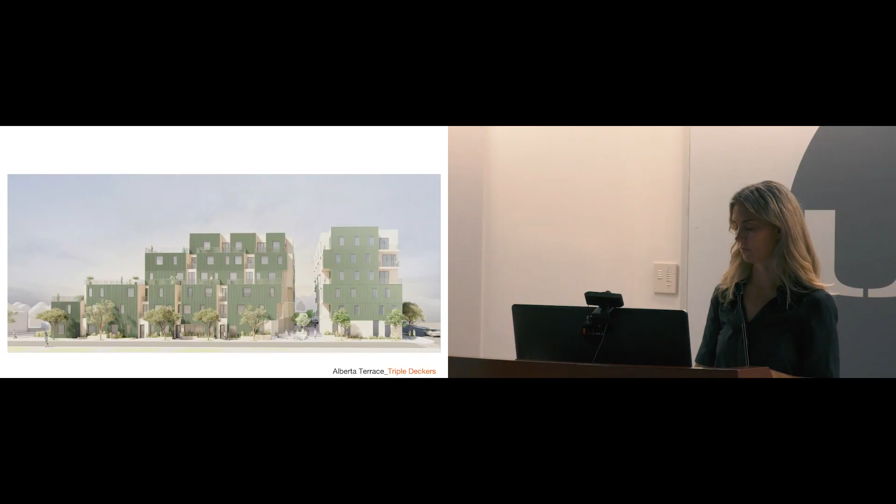This is the juxtaposition, the extreme other side, which is the taller building, the 6-story mid-rise that's going to live on Mass Ave. And then this is my favorite side, seeing the 2 buildings of the Mass Ave side that cascade all the way down to the single family. That gap is called the retail canyon. So there's a whole concept here about retail that will align on the first floor and create this whole pedestrian zone between them off of the main street, Mass Ave.

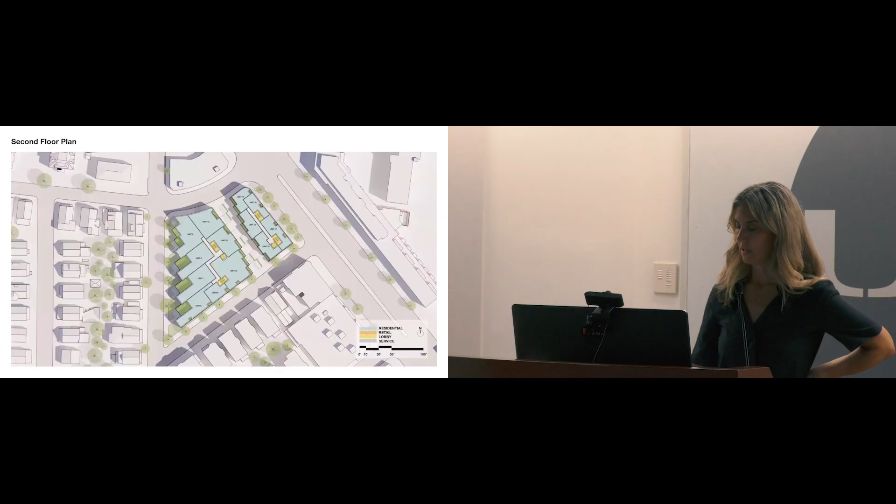And then there are only 2 units on each floor that actually face the canyon that don't have corner windows. So it's actually pretty good. And those will be the smaller, less expensive units. But if I take you through, you can see how the building sets back.

And then the retail canyon. And then last is we're doing our first 100% affordable housing project in Lexington, Mass, which is a really beautiful suburb about 20 minutes outside of Boston. Again, a site that is very contentious because it's surrounded by single-family houses. It's going to be 100% affordable, so a very different demographic is moving in, and we have to do 40

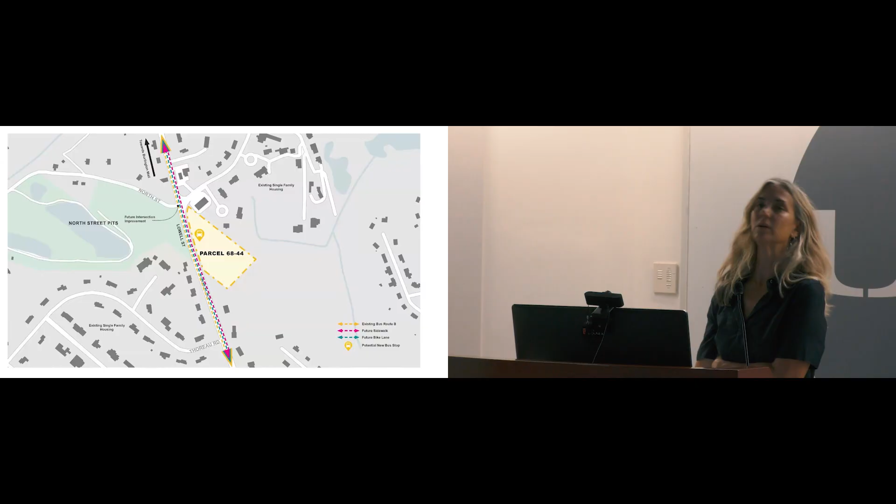units. This is the site. You can see the context, the figure ground of the single family. And so what we did is rather than having a sea of parking, a parking lot, we created this loop road, divided up the 40 units into 4 buildings that actually look like 8. So borrowing and riffing off what we learned in the Jackson project, how they're conjoined at the first floor, but they look like 2 instead of 1 building above the first floor, the second and third floor.

And then actually designing the parking for each unit underneath the building, not underneath as in below grade, but actually as kind of a carport on the first level. So this is an RFP. There are all these 100% affordable developers going for it, and they all had big beefy buildings for the most part, and a lot of parking, surface parking. So I think we won it because I think they love the way it looks, but also because we had solved this issue of the car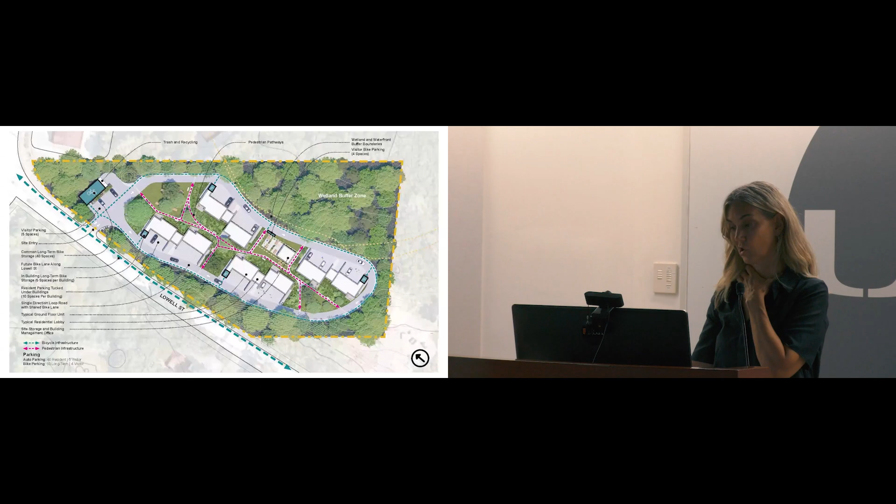in this wooded lot, which also has a whole lot of issues with the wetland buffer zone, et cetera. So stormwater management is super challenging. So another puzzle. But just a few images of where this is. So this is new. We're in schematic right now.

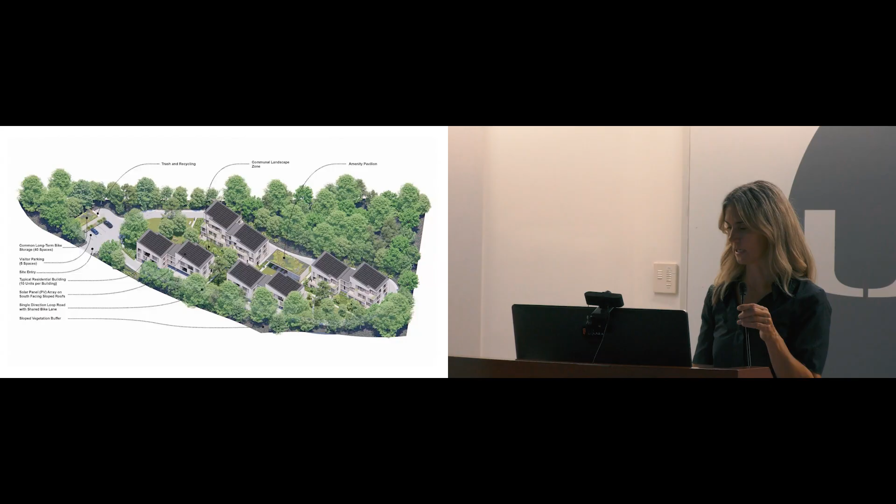And so the idea typologically, single stair. So we minimized each building so it didn't break the code. There are 10 units, you can go up to 12. There are 3 stories, so we were able to get away with 1 stair per building. And so this is the building component that gets repeated 4 times. So there's an efficiency, plenty of outdoor space that becomes part of this kind of new social ecology of place for this new community. And then this is the loop road side.

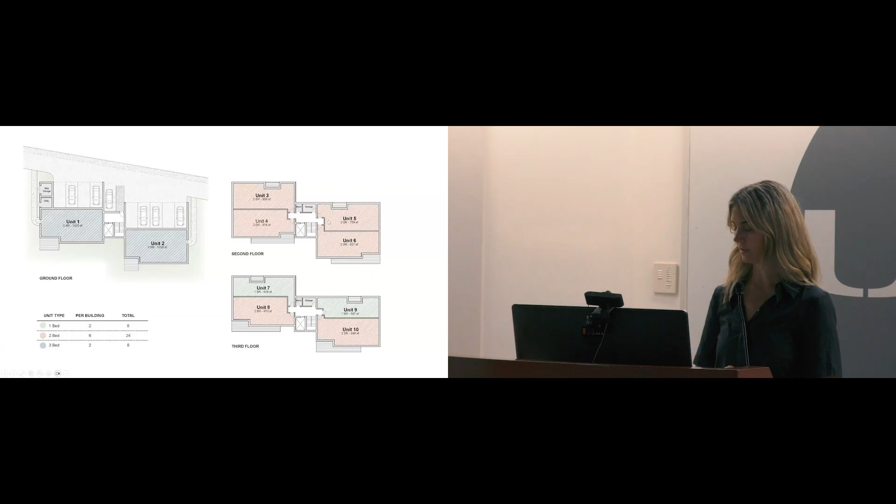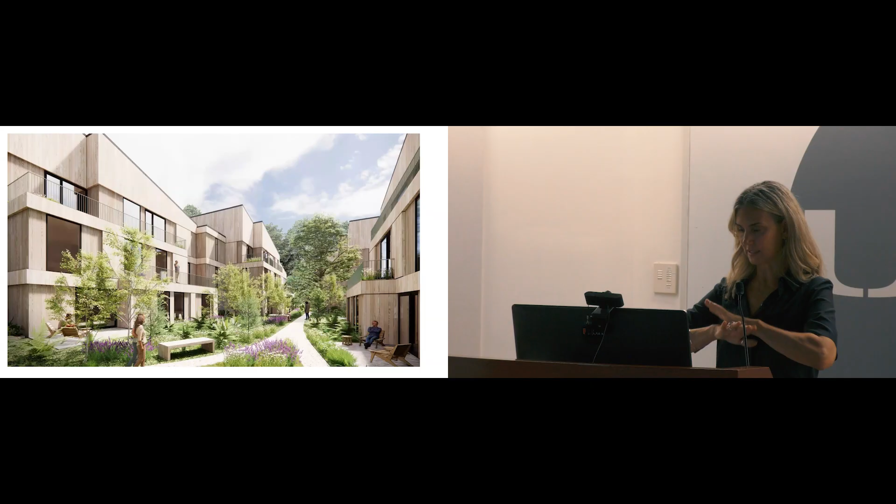You can see how the cars tuck in on that ground level. Simple layouts that come off of that elevator core, which is again, very efficient. A double loaded kind of, but very short. And then again, how the texture of these sawtooth forms and the way that they are grouped as a series of 4 that actually reads as 8 really creates a variety where there isn't that much variety, right? They're all exactly the same. They just get situated on the site slightly differently.

And then a view coming in at the front. And then again, that space in the middle of the site. And then the loop road. Thank you.

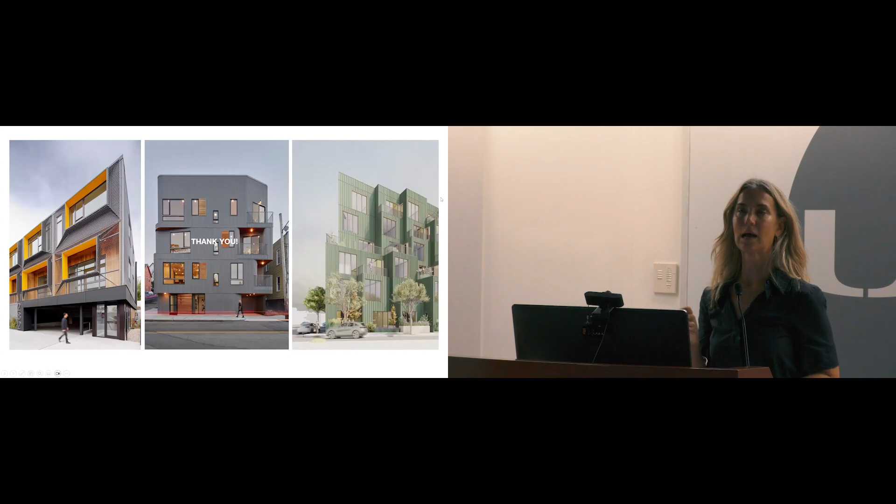Thank you, Elizabeth. It was a wonderful lecture and very inspiring. We generated some questions. I have some questions here with me that we think will help us understand better the complexity in your projects. Were they generated before my talk or after? You seem so ready. Yeah, we did some research, and we're very happy that you came and did this lecture for us. So we wanted to be prepared and to help us understand the different solutions that the housing problem has.

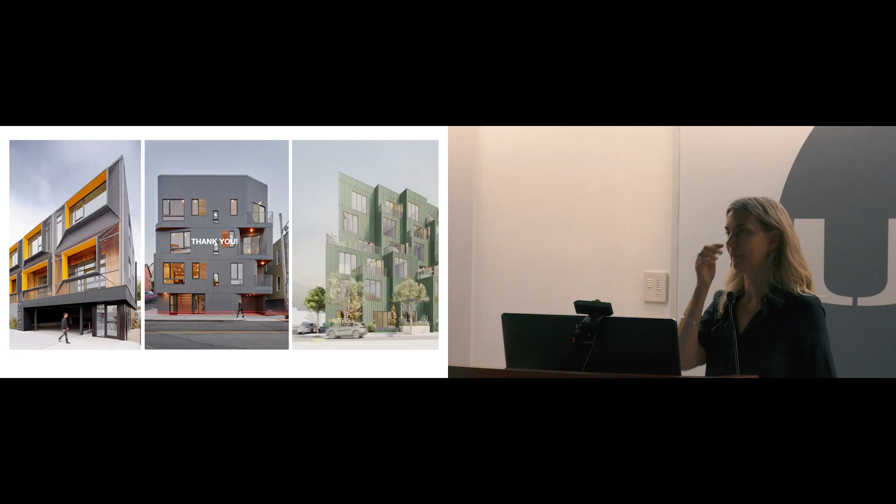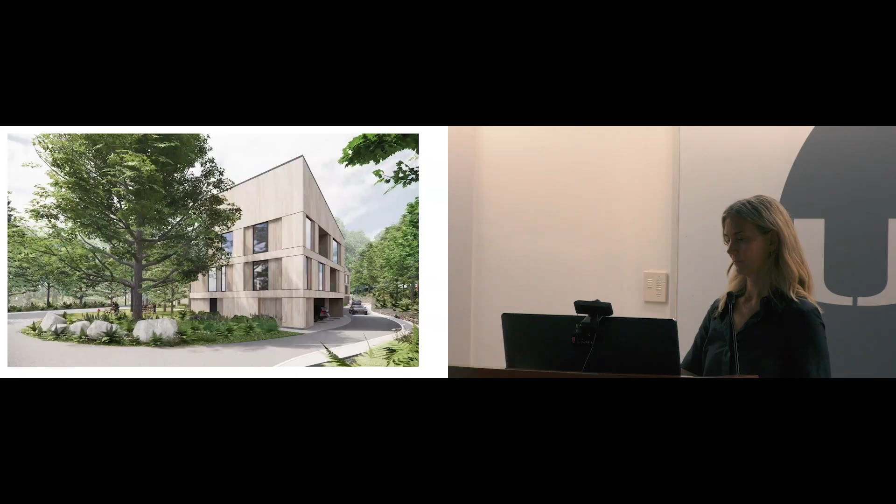Yeah. So one of the questions that we have is related to the cable mills, the modern mill project. The modern mill blends 3 traditions: the colonial clapboard, the brick mill buildings, and the modernist abstraction, while also pushing the sustainability. So how did you balance honoring tradition, history, and regional identity while creating a forward-looking, low-carbon architecture? And do you see this mix as a model for other post-industrial housing projects?

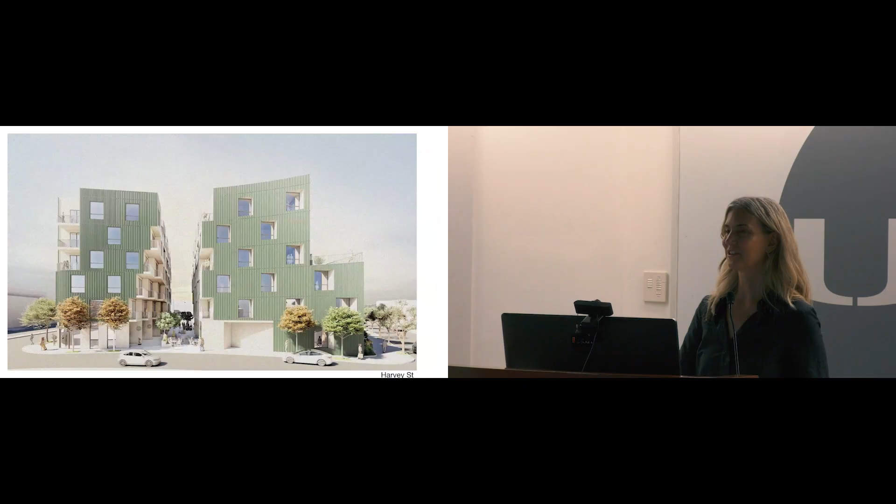That's a good broad question. I mean, I think abstraction is always your friend in architecture, meaning simplifying, right? I think so many of us, especially in rooms like this, are interested in contemporary architecture, right? And so what does that even mean?

So in terms of honoring, I think that was your word. We were really trying to figure out how do we bring in the scale of the mill buildings, in this case, that way. And we knew we were building those river houses, right? So

The modern mill is kind of funny, this building, because we thought of it as like a big barn, you know, one of these single slope shed barns. I mean, who are we kidding? It's huge compared to most barns, especially the vernacular barns that I was showing. But it was thought of as kind of a weird crossover. Again, we're into hybrids, for better or for worse at Merge.

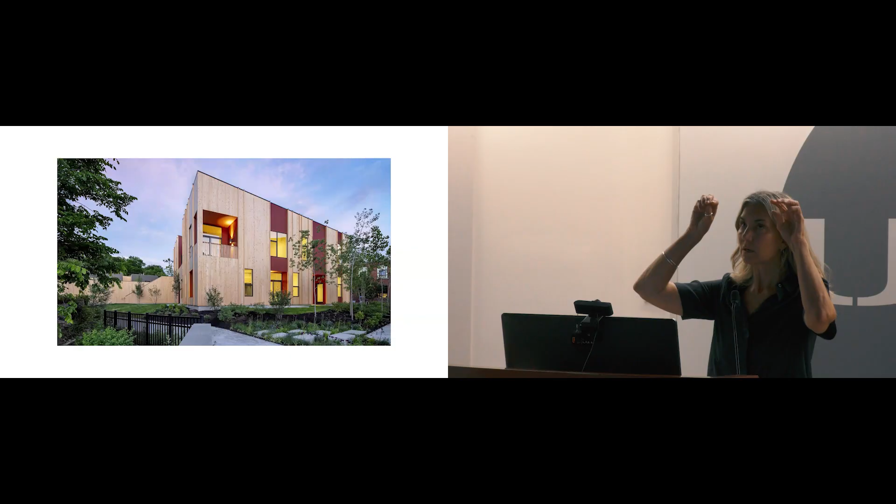But a lot of our work has a lot of color, especially when you saw our interiors. We're not afraid of color. We used to be. And we had to deal with some historical commission conversations and approvals as well here on the site. And so these color carves became also a way of abstraction, to use your word, and clarifying the verticality and the language of the verticality.

Of the mill buildings, of the window. So sort of like the verticality of those proportionally vertical windows of the old mill buildings, making it more overt as a kind of graphic pattern, right? Which are these big rusty red swaths. And then making these big moves of the big carve.

So I don't know if that answers your question, but those are all the things we did that we thought were responding to, honoring, working with the existing language. Yeah. Thank you. We're going to open for if anyone has a question, and if we still have time, we continue with these ones.

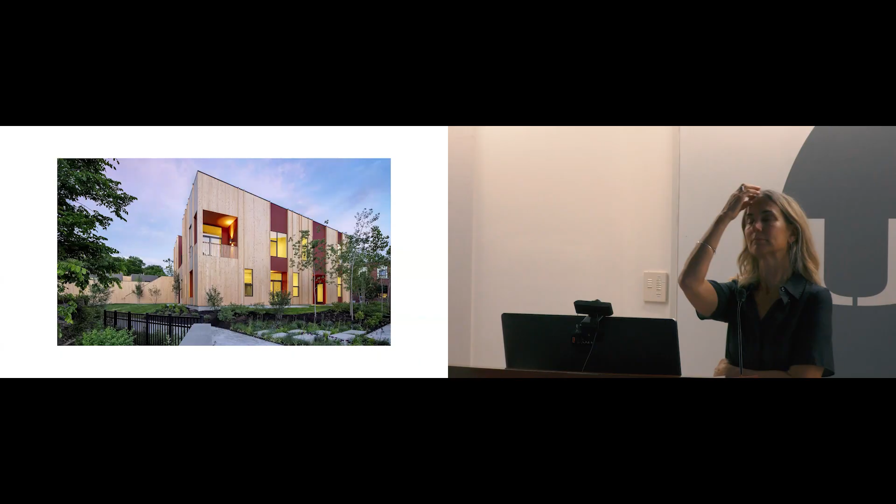Hello, thank you for your lecture. I have a two-part question. The first part is, how do you intend your buildings to age? In other words, what is the expected lifespan that you've put onto your buildings and your work? The second question is, do you think beauty plays a role in the preservation of historic buildings? Or what parameters do you set or perceive in that regard? For beauty, or for beauty in historical buildings, or both? Both. So, okay, I'll tackle the first one first.

The materiality, I hear you. So I'll be honest, wood is hard to master. And we have learned the hard way, and so have so many architects, that you can't control it. Especially if it's solid wood, real wood, right? Now they have all these thermally modified woods, impregnated woods, burnt wood, that require less maintenance or no maintenance. They cost more. So wood has been a real problem with projects over the years.

Because you do it right, you put the right finish on, and then the condo association comes in 3 years later because they need to retreat it, and all of a sudden you show up and it's orange because they've put some horrific finish. So the thing about architects, it's our job to design things that last, especially a building. Interiors come and go, sure, but a building.

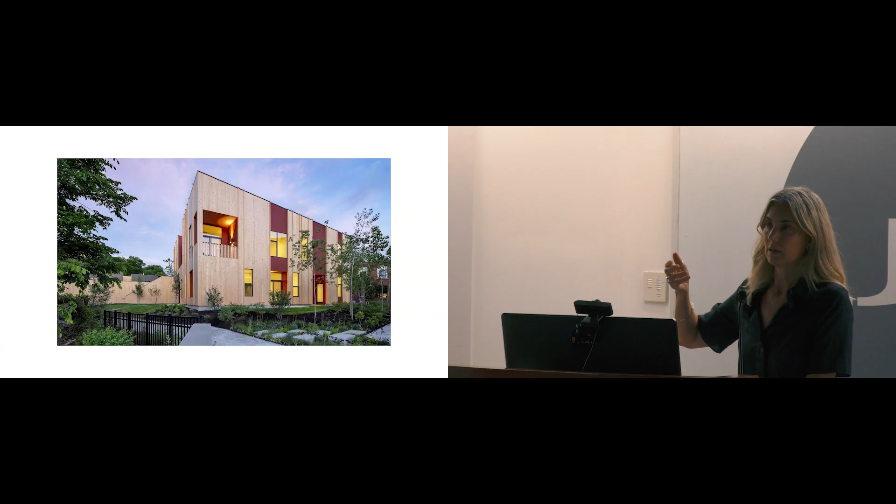I did have one question because you did lobby very hard for the single egress stairs. How do you make it so you're still ensuring safety for your residents in the buildings? Yeah, and that's why so many fire departments have problems with this change. So I look at the science and the statistics and the reality of what's happened over the last 100 years. I don't remember all the numbers, but there's that whole single stair reform brochure, which I think is online, because everyone's trying to get the word out, the people who wrote it, and now me, trying to help them.

There are lots of statistics about how few fires or deaths there have been in Europe with a single stair versus the US. It's just not the safety hazard that everyone thinks it is. It has to do with distance from your unit to the outside, right? And the interesting thing about single stair is the corridors are shorter. Yes, I know there's an equation about half the distance if you have two stairs. But the statistics show that it is not less safe, if you only have a certain amount of units and your building is only a certain amount of stories high, to do one stair instead of two.

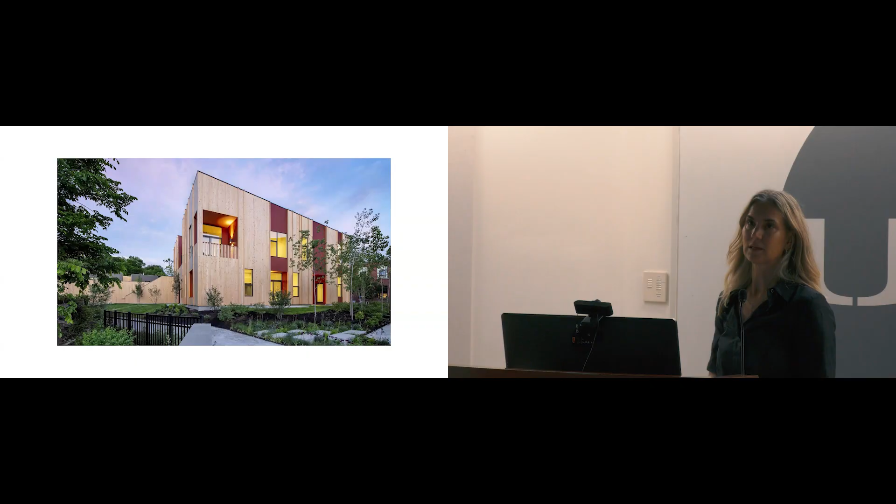So there's a whole conversation, and a very impassioned one, about the facts that state that it's not a danger. And it all depends on dimensions, right? So it can't be for every building and it can't be for every distance. But yeah, that's the question, and that's why it hasn't happened. But there's a reality that it could, given the science and the research. The science of a building, yeah.